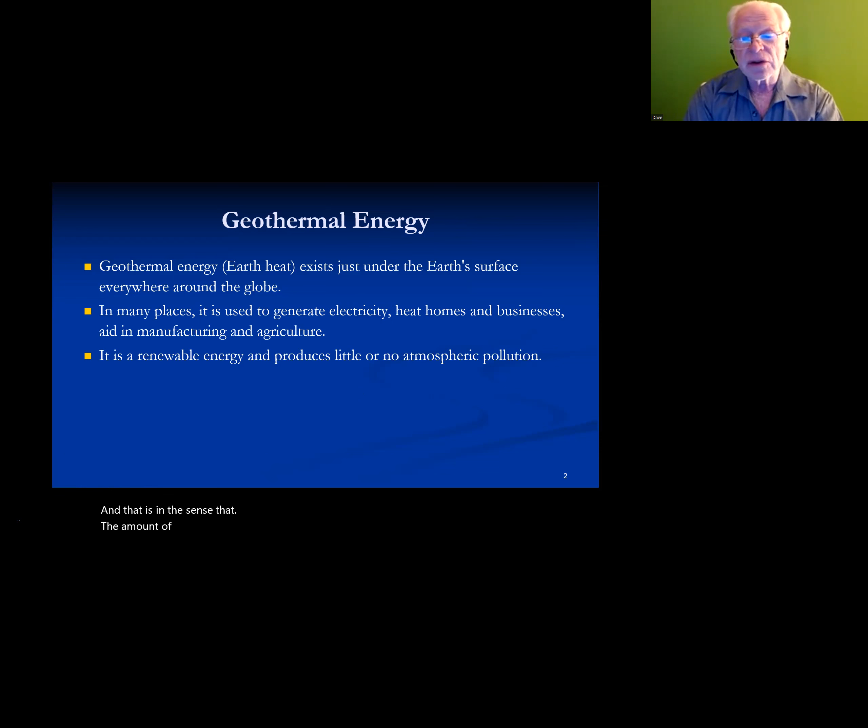And the energy exists under the earth's surface everywhere around the globe. In many places, it's already used to generate electricity, heat homes and businesses, and it's also used in certain types of manufacturing and agriculture. It is a renewable energy, in the sense that the amount of energy that's inside the earth is going to last for billions of years. Now, the sun is a renewable source, and the sun is going to last billions of years. So it's on the same order of magnitude as the sun.

But today, very little of our energy use comes from geothermal energy. A very small part of it. And that hopefully will be changing. So I'm going to discuss the different types of geothermal energy, the advantages and disadvantages and problems of using it, and what prospects there are for increased use in the future.

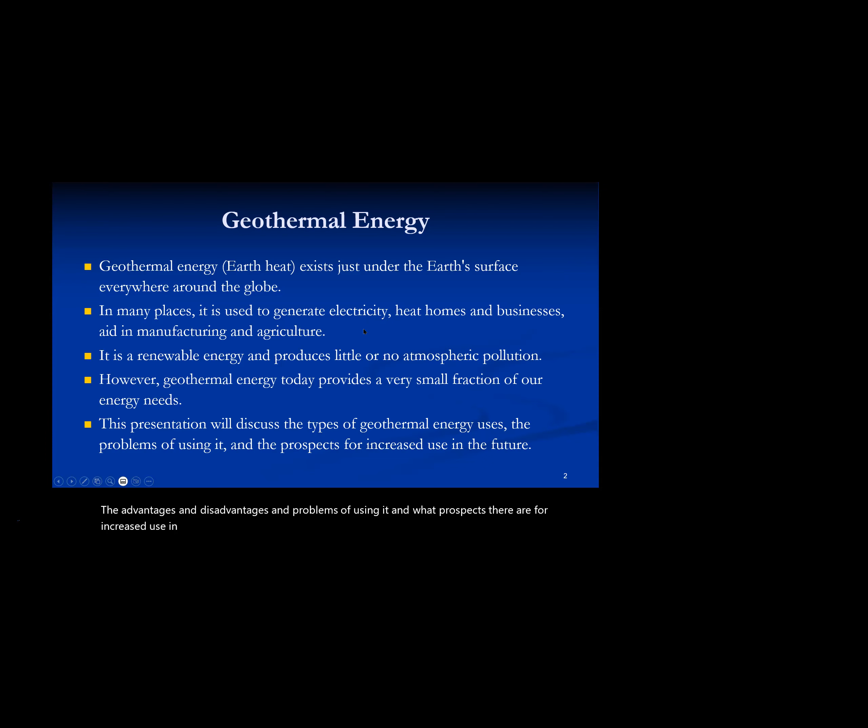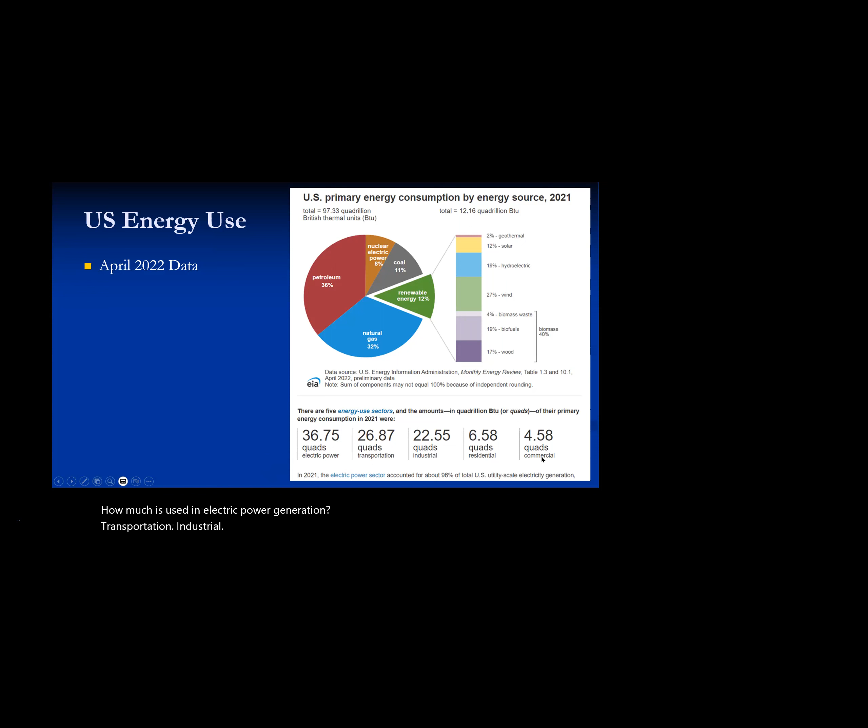Down here, and this is quadrillion BTUs. This is how much is used in electric power generation, transportation, industrial, residential, and commercial. So the main purpose of showing you this is just to put geothermal in the tiny fraction of energy use in this country that it has right now.

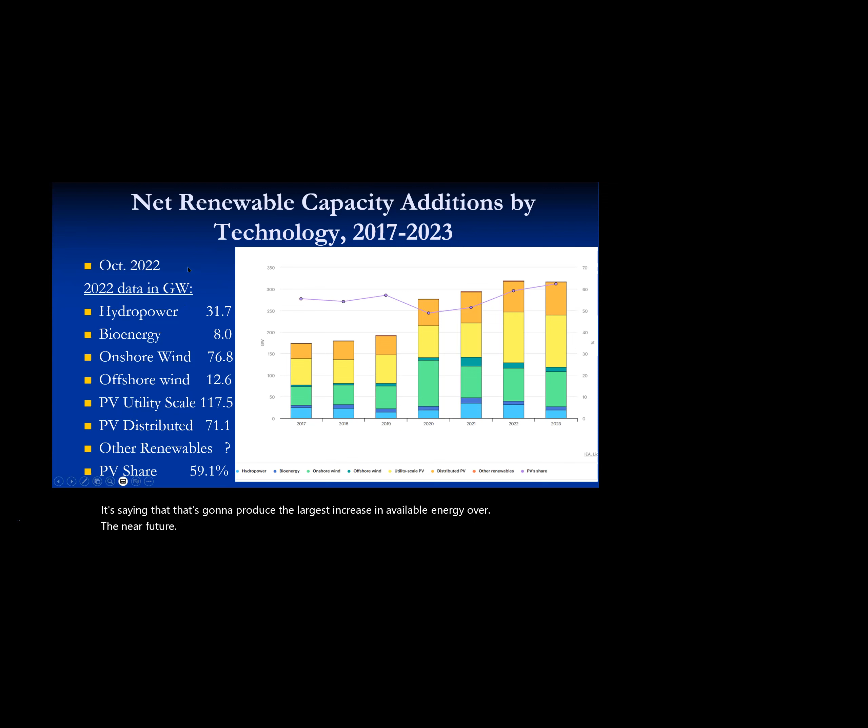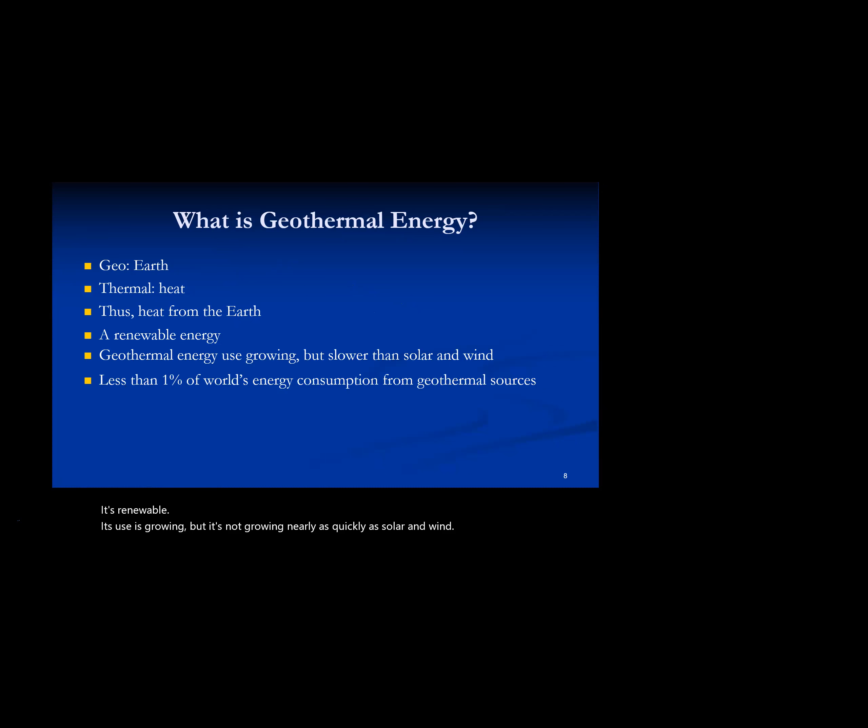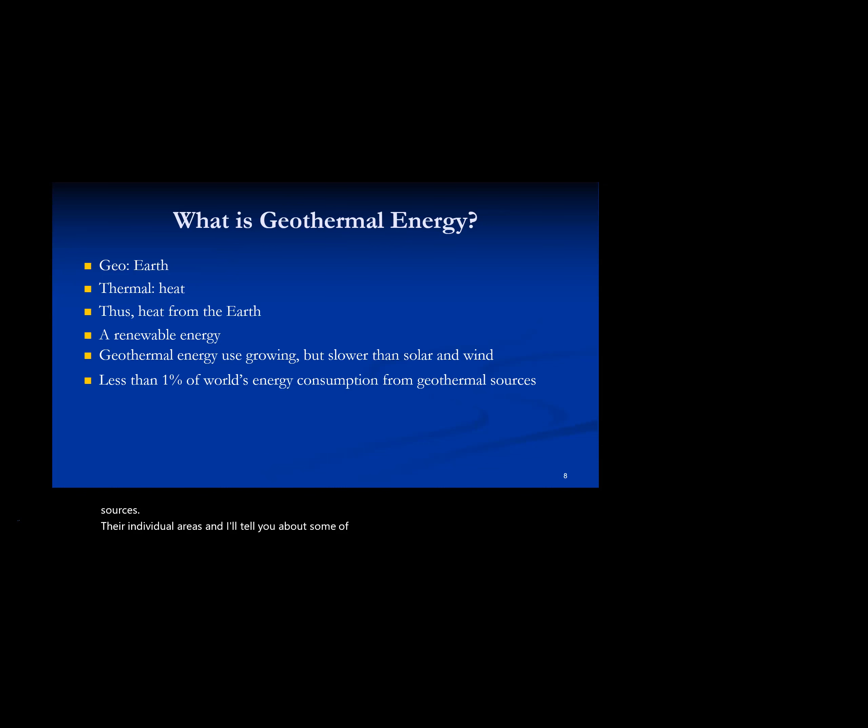So let's talk about what geothermal energy is. From the Greek, geothermal would mean earth heat. So heat from the earth is what we're talking about. It's renewable. Its use is growing, but it's not growing nearly as quickly as solar and wind. Today, less than 1% of the world's energy consumption comes from geothermal sources. There are individual areas, and I'll tell you about some of those, where the percentage is much, much higher. But those are just small areas.

We also, in places where it's not that easy to get, we drill wells. And so we encourage the energy to the surface. And you can find the energy in some places in hot water, in other places steam. Some places there is no water or steam, so it's just hot rocks, but we can still make use of those for energy use, and also in magma.

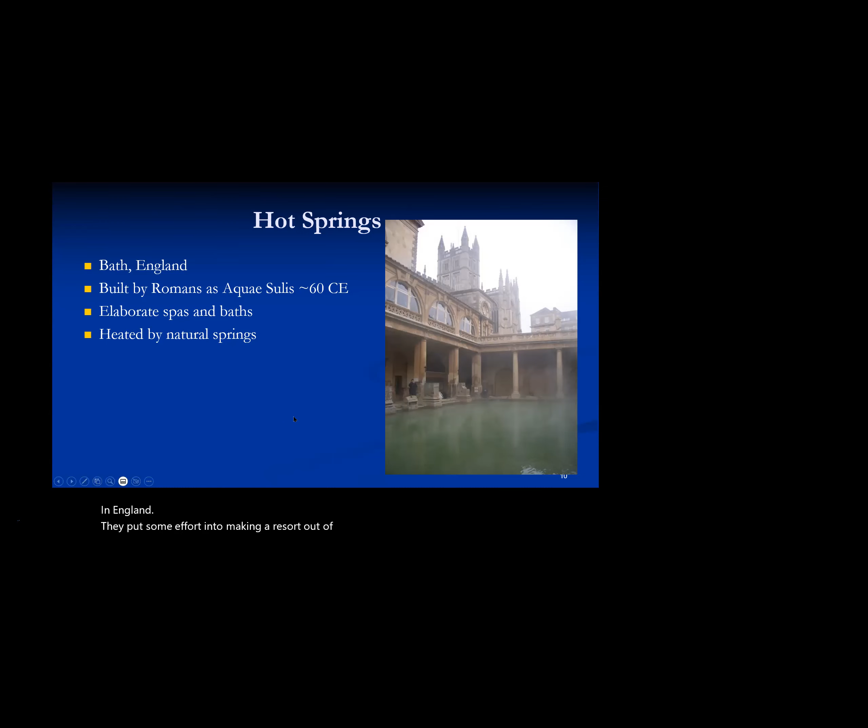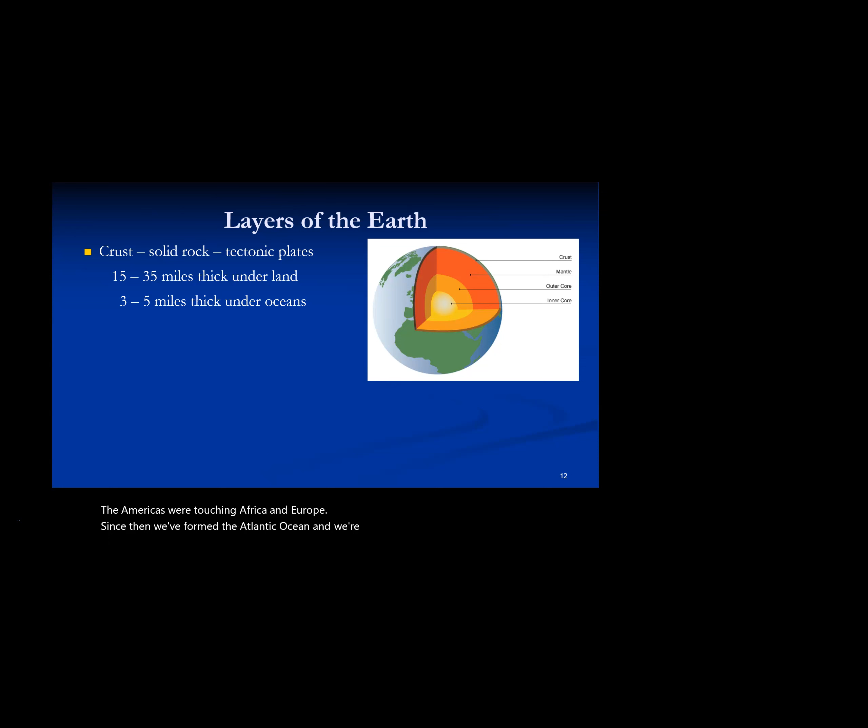All right. So let's take a look at the layers of the Earth. The top layer we call crust. It's solid rock, and the rock is in tectonic plates. The plates over millions of years have moved around. If you look at the pictures of a couple 100 million years ago when the Americas were touching Africa and Europe, since then we've formed the Atlantic Ocean and we're now separated, but those plates are still moving around. They are 15 to 35 miles thick where there's land, but only 3 to 5 miles thick under oceans.

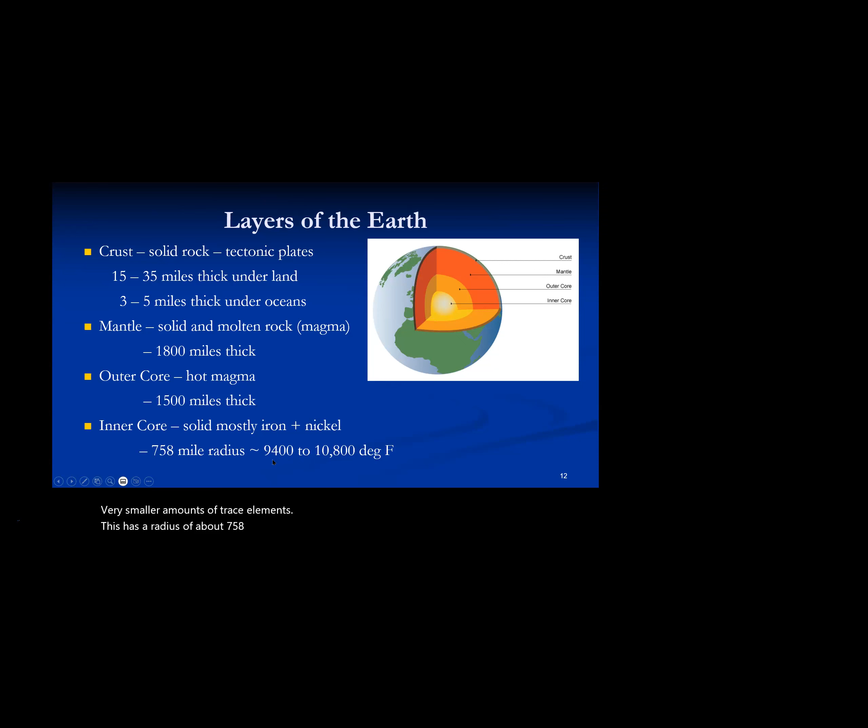Beneath the crust is the mantle, which is solid and magma. So it's solid rock and magma. That's 1,800 miles thick. And then beneath that's the outer core, which is hot magma. And that's 1,500 miles thick. And beneath that is the inner core, which is mostly solid iron and some nickel mixed in and some very small amounts of trace elements. This has a radius of about 758 miles. And depending on where you read, the temperature is either around 9,400 or 10,800 degrees Fahrenheit.

Now, recent stories have said that the rotation of the core may have paused. And apparently over history, it does that from time to time and reverses rotation direction. So I'm not going to go into that in any detail, but just wanted to make note of it.

And there's another paper that was just published that said they think maybe 100 miles down, there are streams of liquid magma moving around, and they may have something to do with the movement of the tectonic plates. I haven't read that whole thing, but that's something that just came out.

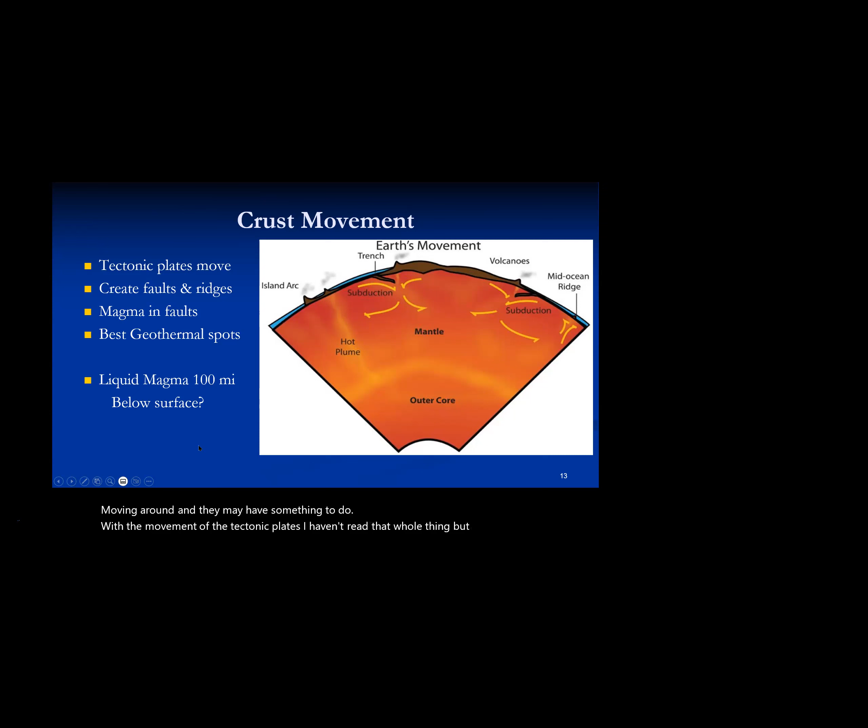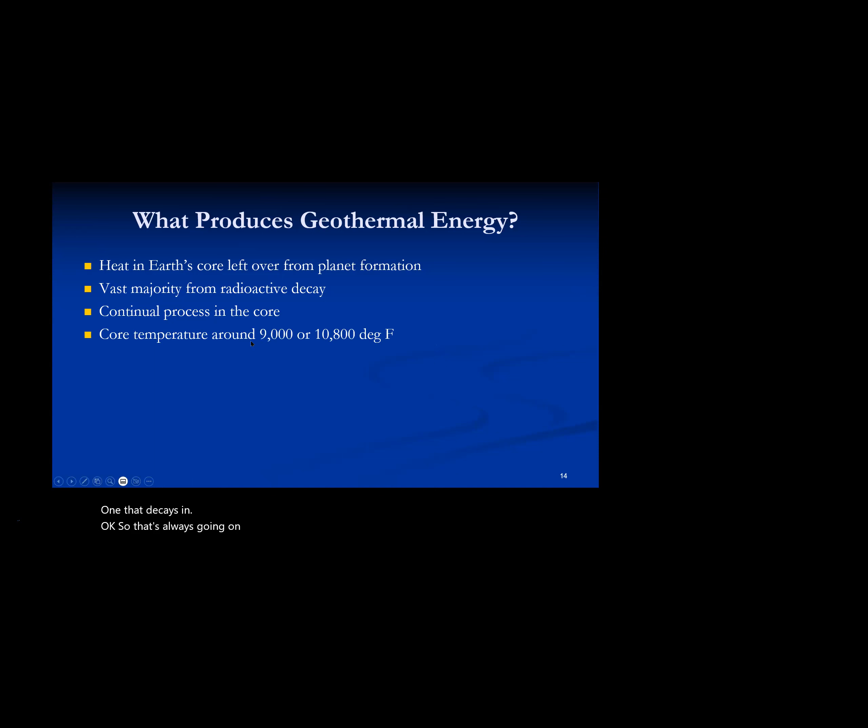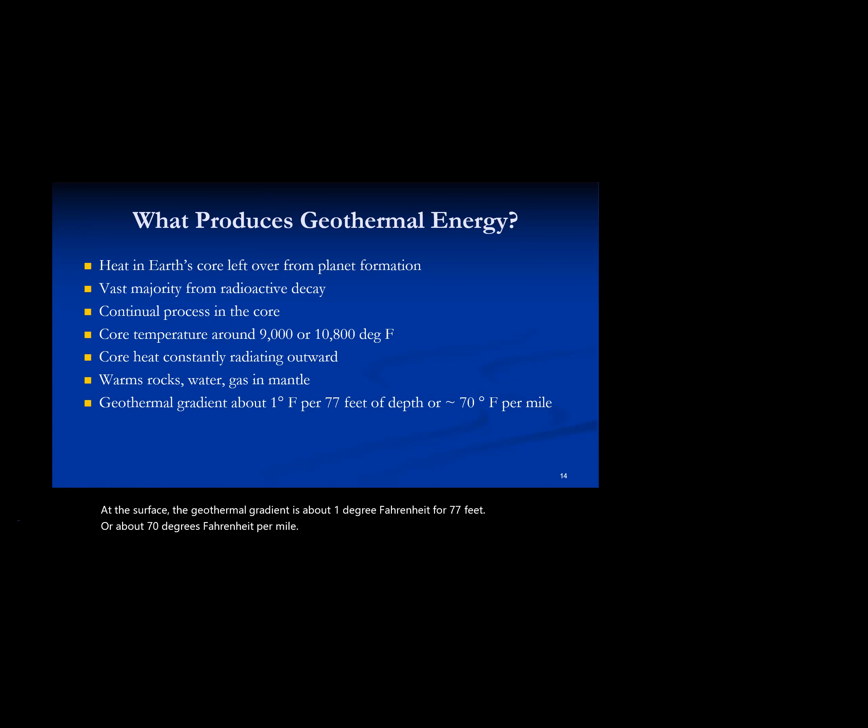At the surface, the geothermal gradient is about 1 degree Fahrenheit per 77 feet, or about 70 degrees Fahrenheit per mile. That's not constant as you go down. If it were, you'd get to much higher temperatures in the core. But anyway, near the surface, that's what the gradient is. However, it can be a lot higher if you're in a geothermal reservoir. So if you're in an area that's been heated up by the internal core, the gradient could be much higher.

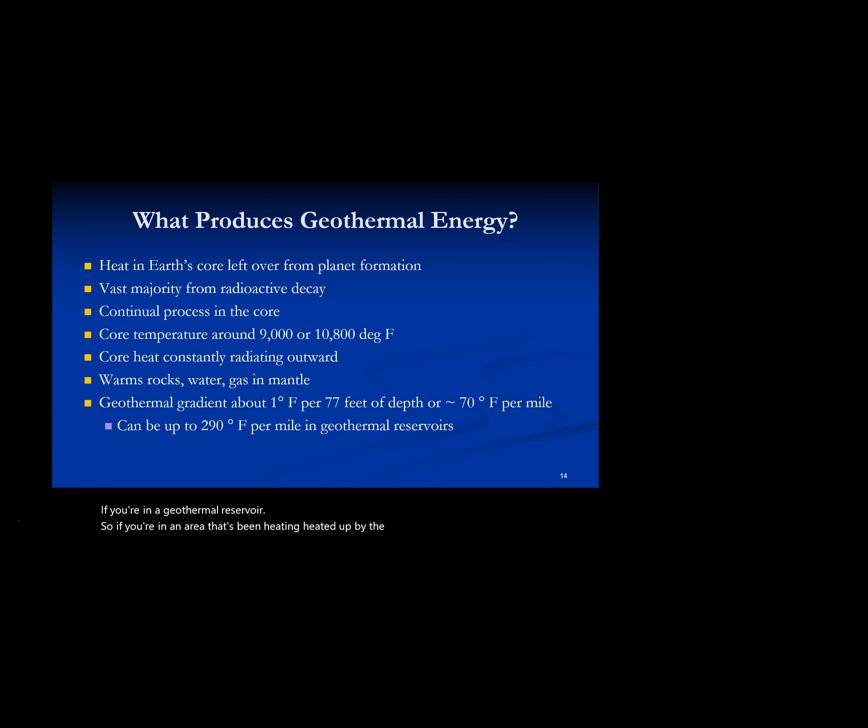So, advantages of geothermal energy. For one thing, it's renewable. So it's not going to run out, as our fossil fuels will. It's reliable. The heat source is constant. You go down a little bit into the earth, and the temperature's pretty constant year-round. It's always available. It's not like wind and solar that only provide energy for you some of the time. It's always there. Not subject to weather.

And it's spread out all over the world. There are sources pretty much everywhere. Some much easier to get at than others, but it's everywhere. And it produces either very little or no pollution at all, which is a huge advantage. When you build power plants to use geothermal energy, they can last for decades and centuries. Yeah.

The power plants, when built, are smaller than power plants using other forms of energy. And not only that, but they can be scaled up and down, and they can be made much smaller than fossil fuel power plants.

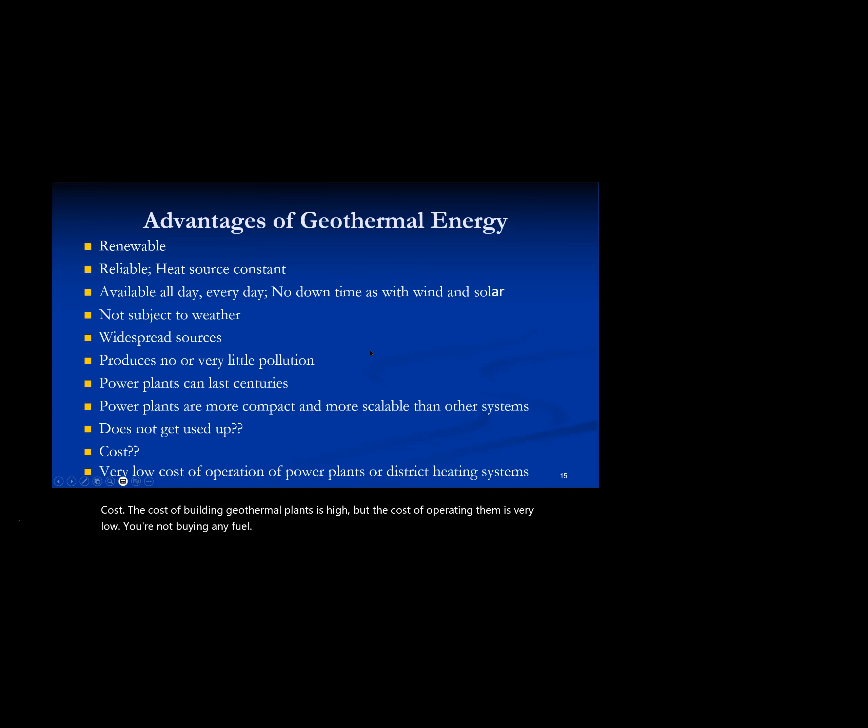The cost of building geothermal plants is high, but the cost of operating them is very low. You're not buying any fuel. Okay. So what are the disadvantages? Well, you can get small earthquakes.

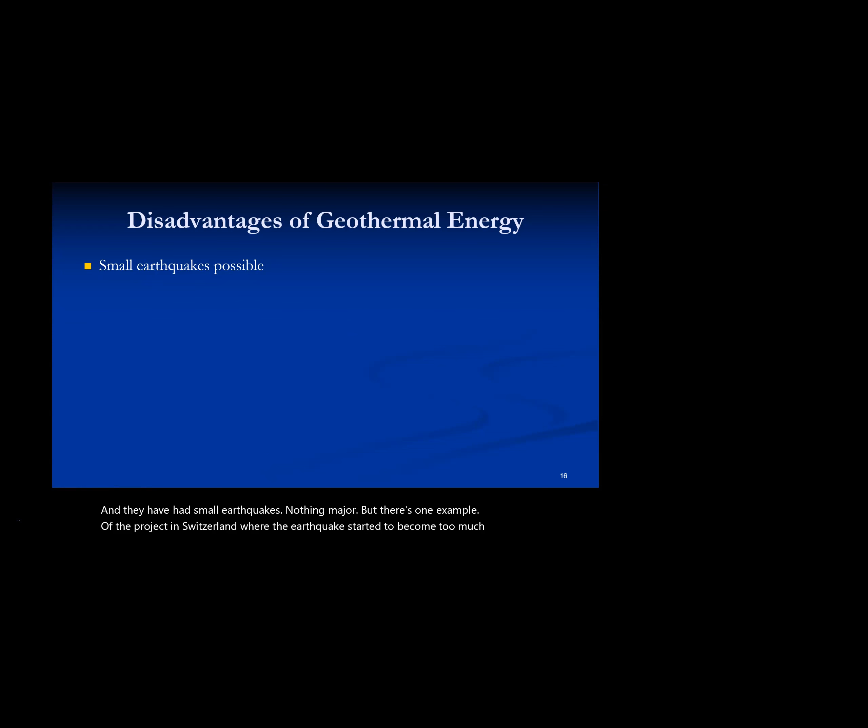When you build the power plants and you drill into the ground and you push cold water down through these wells, it can crack the rock. It can increase the size of cracks that are already there. And they have had small earthquakes, nothing major, but there's one example of a project in Switzerland where the earthquakes started to become too much of a problem and they closed it down. They closed down the geothermal power plant.

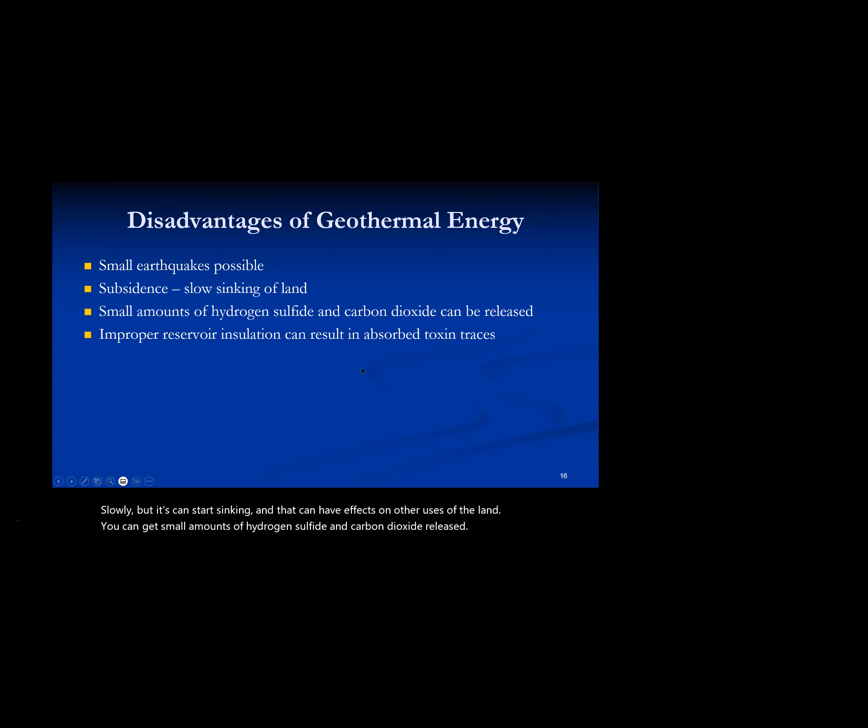Subsidence happens also. You're making all these changes to the crust, and sometimes the land can start sinking slowly, but it can start sinking, and that can have effects on other uses of the land. You can get small amounts of hydrogen sulfide and carbon dioxide released. If you don't properly insulate the reservoir, the water that's in it can go over and absorb toxins. And so they can come up to the surface and can be released. So that is one caution.

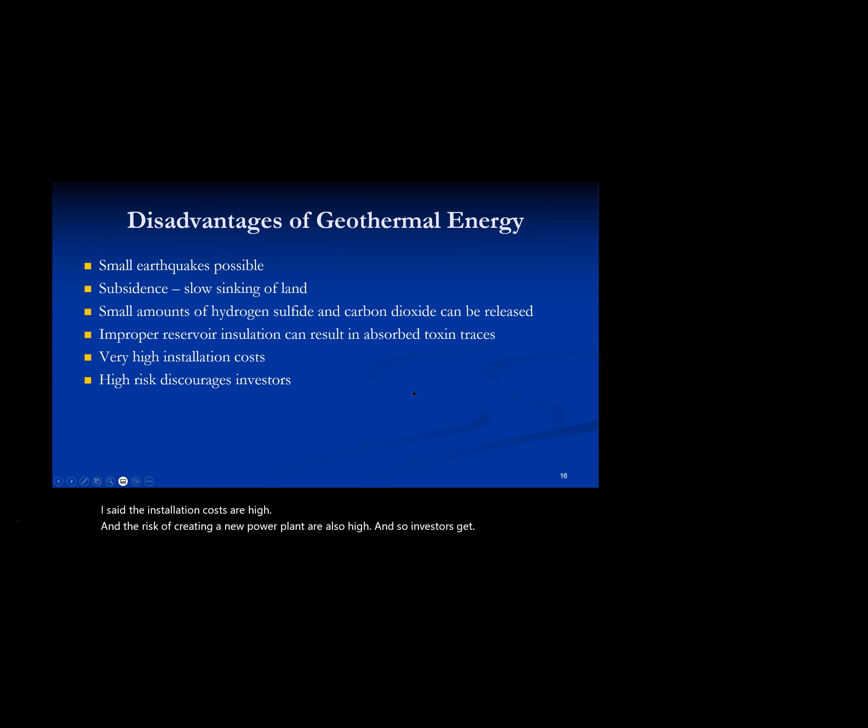I said the installation costs are high, and the risks of creating a new power plant are also high. And so investors get discouraged by that. So what are some of the problems? Well, to produce energy, you need the heat near the surface. And that's only true in maybe 10% of the surface. It's all over the place, but it's not every place. It's particularly available along fault lines.

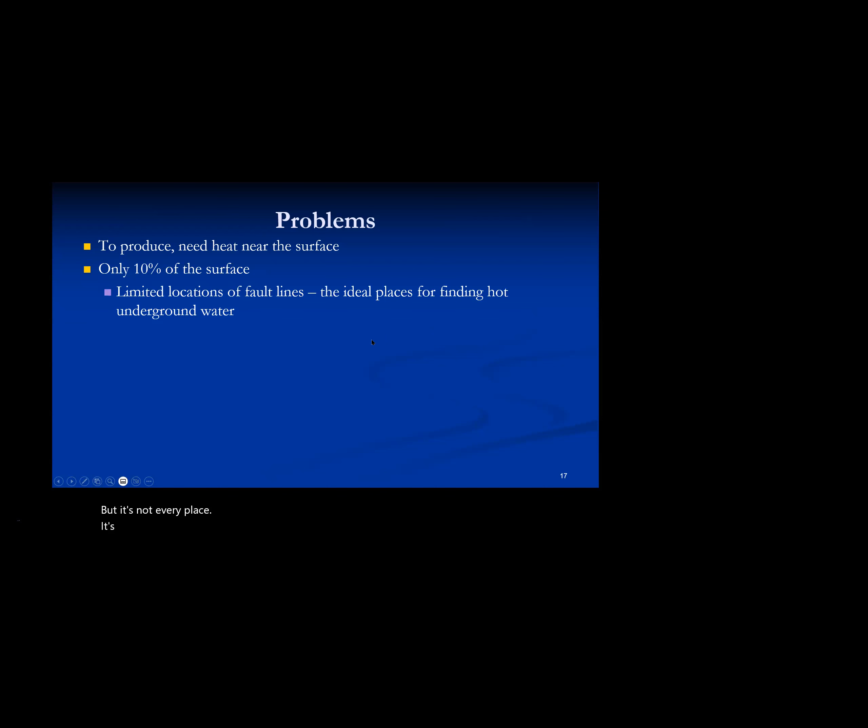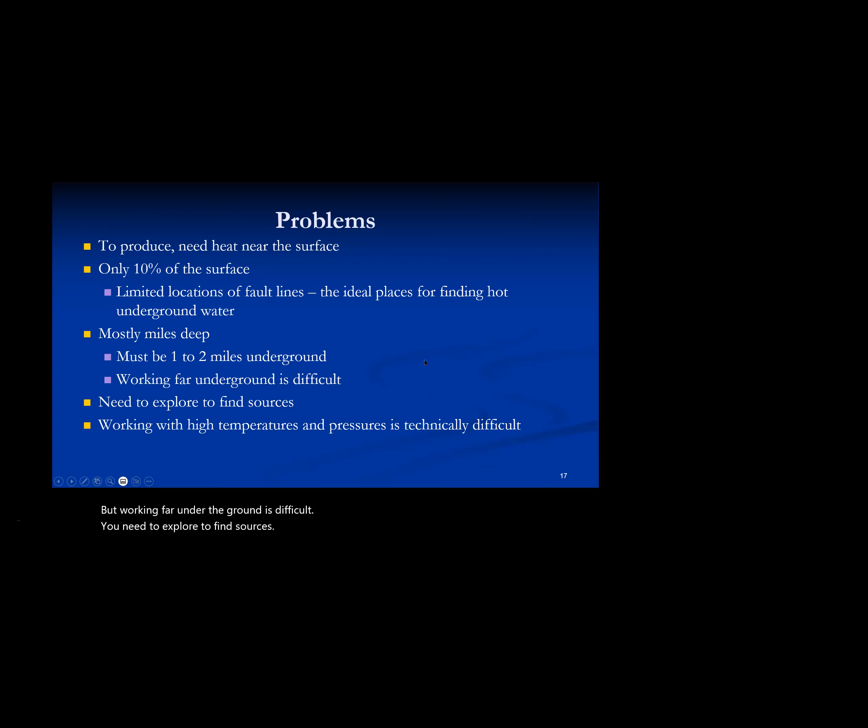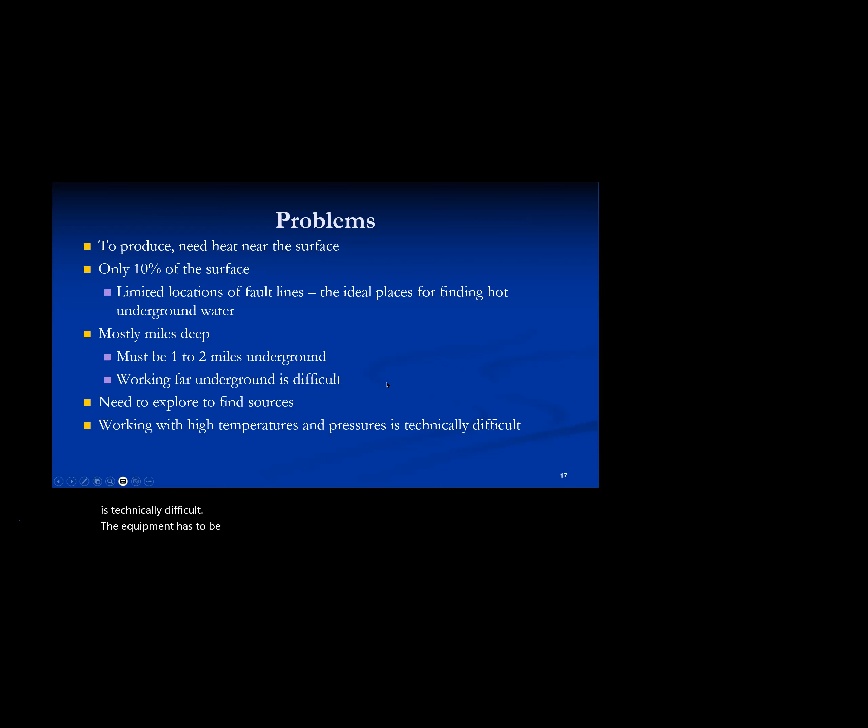So what are these risks? If you want to drill holes deep into the surface, going down miles, that gets expensive. You might find a place where you think you're going to find a suitable heat source, and maybe it doesn't turn out that way. When you find a source, it might run out. And that's especially when you try to extract more energy than the Earth is putting into that particular source. It's expensive to put the heat pump pipes into the ground. And I'll show you some more detail of that.

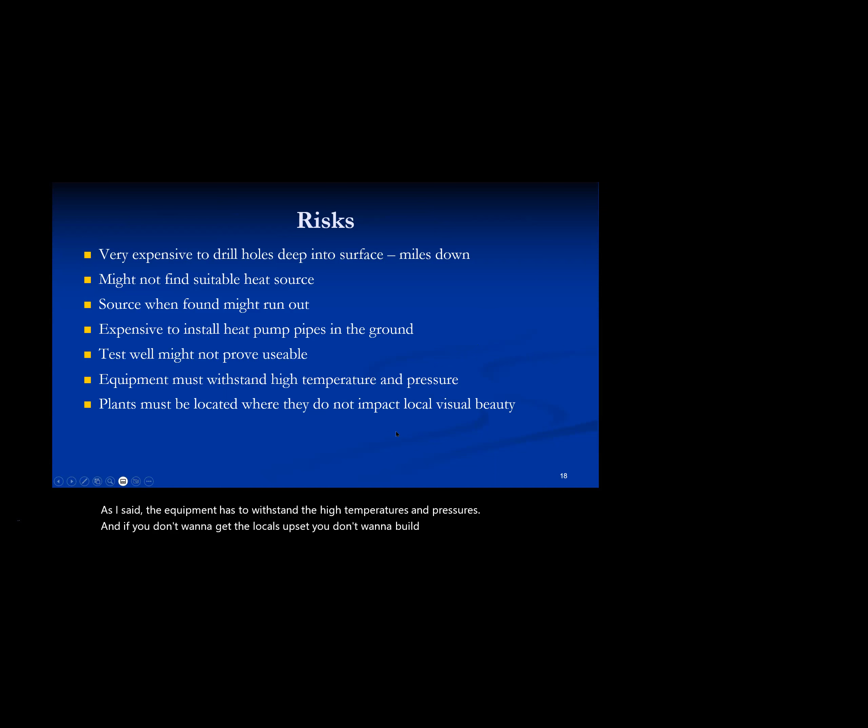If you have a test well, you may not be able to use it. As I said, the equipment has to withstand the high temperatures and pressures. And if you don't want to get the locals upset, you don't want to build it where they think there's a beautiful scene. So that's another constraint.

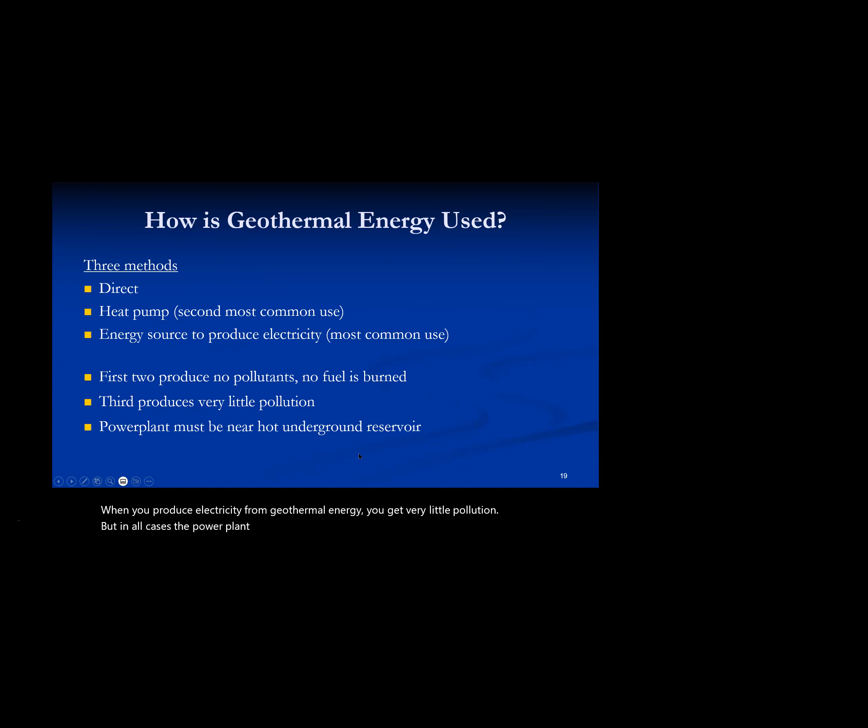So how is geothermal energy used? Well, there are 3 main methods. The direct, the heat pump method, which is the second most commonly used, and the energy source to produce electricity. And that is the most common use of geothermal energy. The big advantage of the first 2 of these, they produce no pollutants because there's no fuel burned. You do have to use some electricity to run things like pumps, but no fuel is being burned right there. When you produce electricity from geothermal energy, you get very little pollution. But in all cases, the power plant has to be built near some hot underground reservoir.

Okay. So, producing electricity, and this is the most common method. Currently, I think this was from last year, 26 countries are doing that. If you're going to produce electricity, that's good because the users don't have to be local. Around the world, something like 11 million homes are using geothermal energy for their electricity. That number might be higher because I didn't get this year's numbers for everything.

This uses water that's usually 300 to 700 degrees Fahrenheit. And you put your power plant near the heated water or steam that's underground. You drill the well or the wells into the reservoir 1 or 2 miles deep. Down there, the pressure is very, very high, and it keeps the water liquid. So you bring that up through your pipes, and the hot water or steam at the surface can be turned on turbine blades, which spins the turbine, and the turbine then spins a generator, which gives you the electricity.

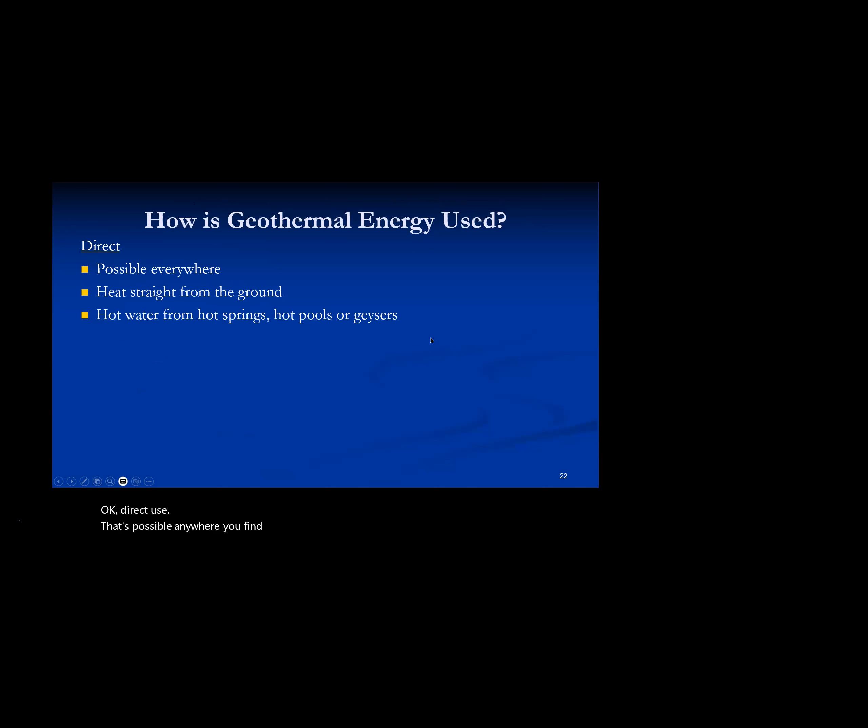Okay, direct use. That's possible anywhere you find an underground reservoir. You bring the heat up straight from the ground. It comes up in hot springs and pools or geysers. And people have been using that for bathing, for cooking, for heating their pools, their houses, and all these other things, including sidewalks and roads in the winter. It keeps greenhouses warm. They use it at fish farms, drying lumber, and processing fruits and vegetables. So it has a wide range of uses.

Or you can drill two deep wells. Now, with direct use, in general, you drill one well and you bring the steam or the hot water up and use it. But you can drill two deep wells, so you pump water into one. The water goes over hot rocks, gets heated up, and then you bring it up to the surface and you recycle it. And of course, there are also tourist attractions that use the direct geothermal heat.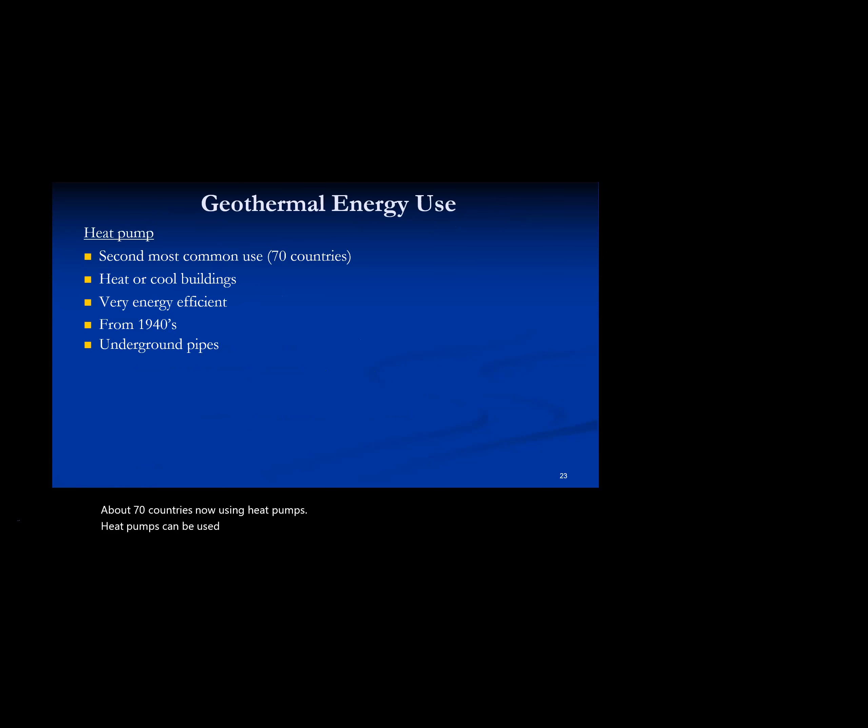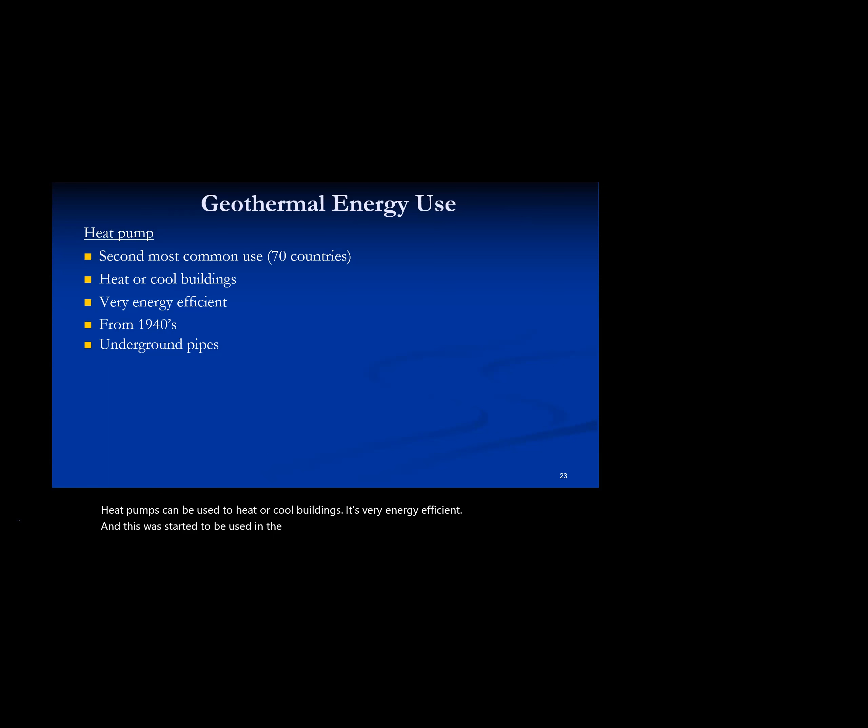The second use is heat pumps. About 70 countries are now using heat pumps. Heat pumps can be used to heat or cool buildings. It's very energy efficient. And this started to be used in the 1940s. So there are pipes under the ground, maybe 6 to 8 feet below the ground, and the temperature is pretty steady there, 55 to 60 degrees Fahrenheit, year round. When the surface freezes, that's just the first 2 or 3 feet, so it's above this. And a single system can be used to heat or cool houses.

When we're finished, I just found an hour ago some better pictures than the ones I have in here. If I have time at the end, I'll show them to you.

Now, the heat pumps can use either horizontal pipes in the ground, which only takes a couple of days to install, but requires a greater land area than when you put them in vertically. But that takes longer. You have to dig deeper. But it doesn't require as big a heat reservoir underground.

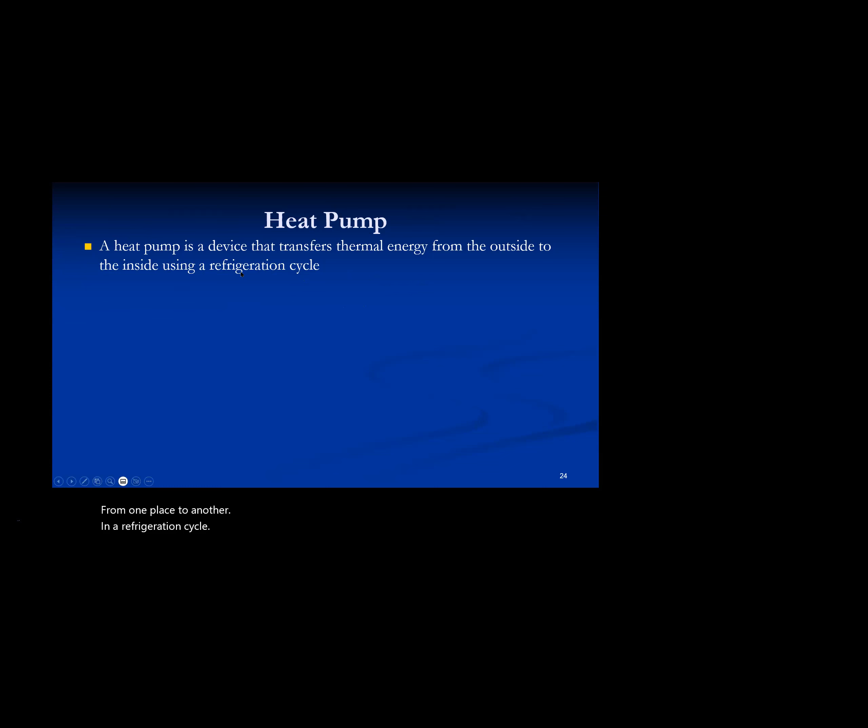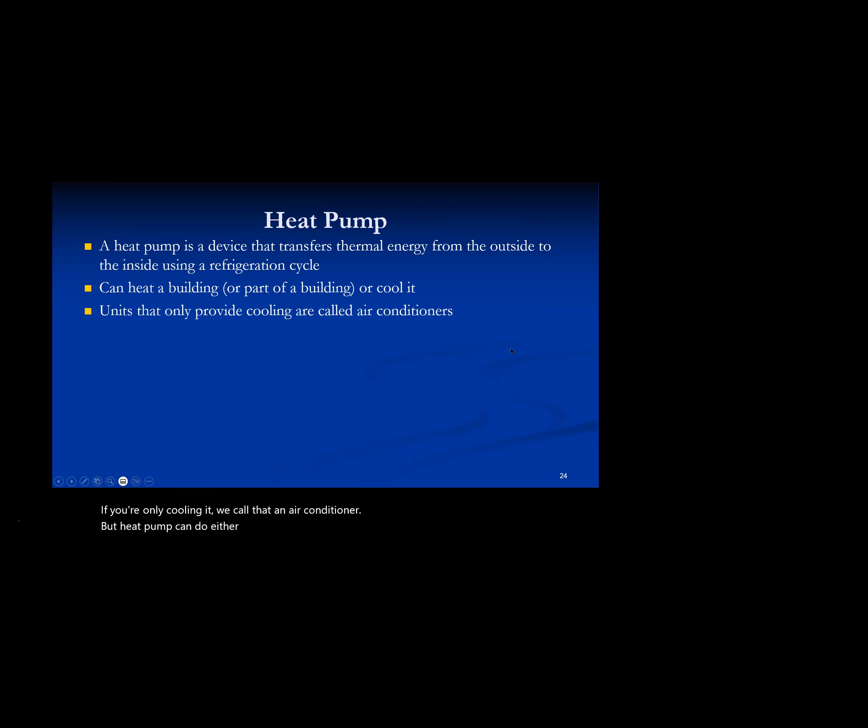So a heat pump is a device that takes thermal energy from one place to another. The refrigeration cycle is the cycle that the heat pump uses, and that can run either forward or backward. So you can heat a building or you can cool it. If you're only cooling it, we call that an air conditioner. But a heat pump can do either, and all you have to do is reverse a valve.

So it has a closed loop. Most of them have closed loops with one end inside and the other end outside the building. You circulate a fluid through that loop. You cool that liquid in one place and release the heat in another. I said that backwards. I'll show you the picture. It's clearer with the picture.

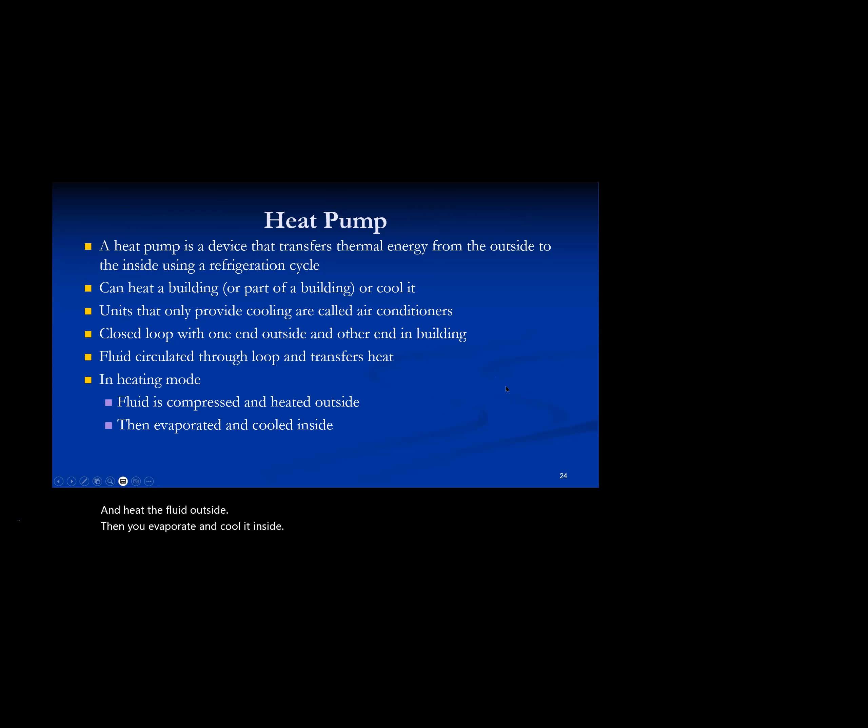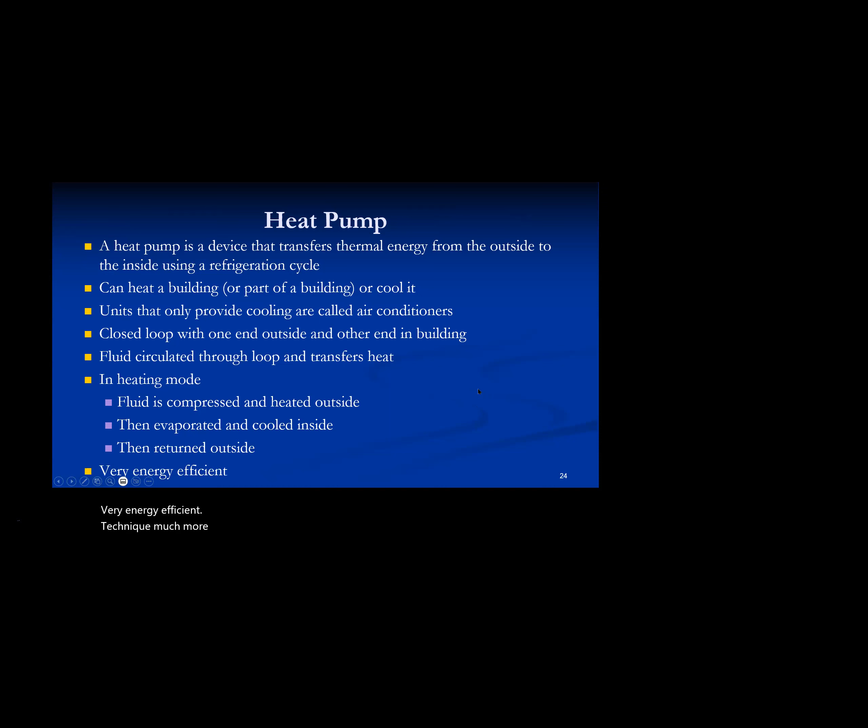In the heating mode, you compress and heat the fluid outside. Then you evaporate and cool it inside. So you're transferring the heat from outside to inside, even though if you're doing it with an air heat pump, you're taking heat from air outside that you may not think is hot. But by using this fluid, you're able to do that. And then you complete the cycle. Very energy efficient technique, much more efficient than using fossil fuels, because you're not burning anything.

And it's interesting because engineers and physicists like to use this type of a diagram to describe the process. But one of the problems with this is, and I guess it's von Neumann who said, nobody really understands entropy.

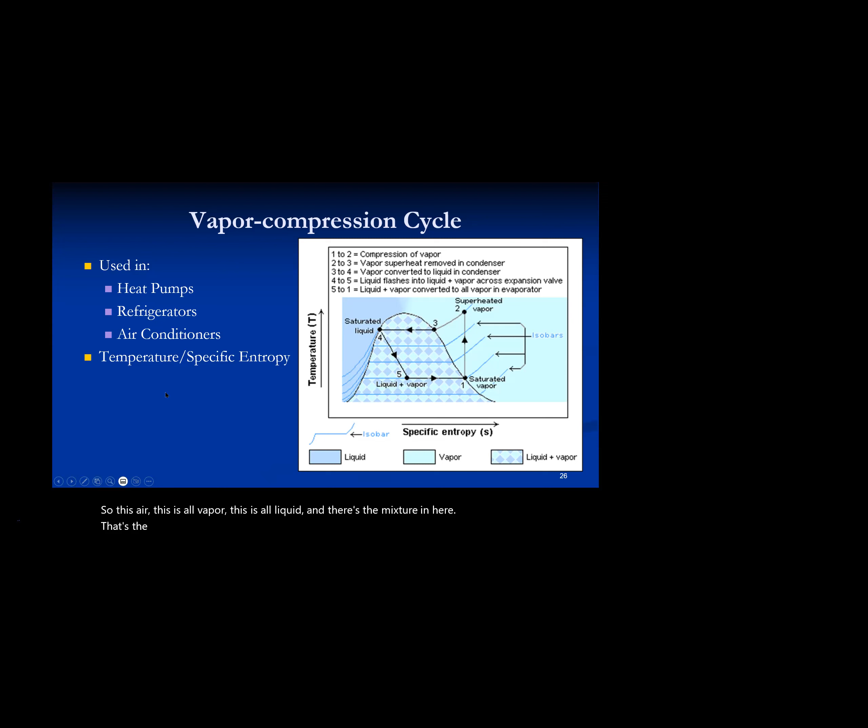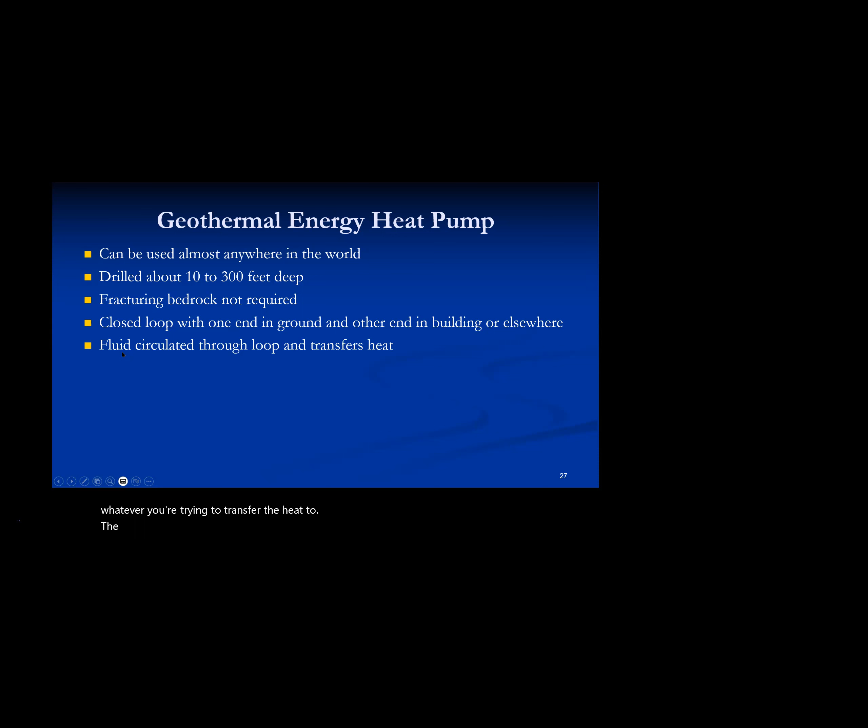So let's talk about the geothermal heat pump. This can be used just about anywhere in the world. You drill 10 to 300 feet into the ground. You don't have to fracture bedrock for this system. In general, there's a closed loop, one end in the ground, the other end in the building, or whatever you're trying to transfer the heat to. The fluid is circulated through the loop, transfers the heat, very energy efficient.

And this is possible because the ground temperature is about 50 to 60 degrees, which is warmer than the air in the winter and colder than the air in the summer. And that's just what you want to operate your heat pump. The Environmental Protection Agency called geothermal heating the most energy efficient and environmentally safe heating and cooling system that we have available.

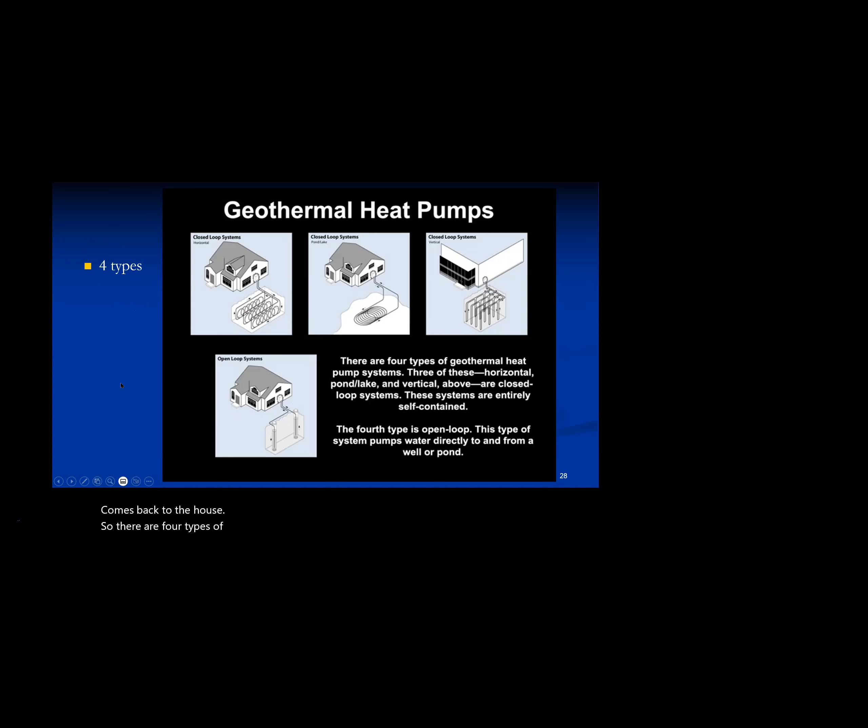Just want to briefly mention, low temperature geothermal energy comes from heat below 300 degrees Fahrenheit. It's available in lots of places a few feet below the ground, and it's used for heating greenhouses, homes, fisheries, and industrial processes.

Okay, so let's talk about the different types of steam plants. In the flash steam plant, high pressure hot water is pumped to the surface and flashed into steam to run the turbines. The cooled water is then returned into the ground, and most geothermal power plants today are of this type.

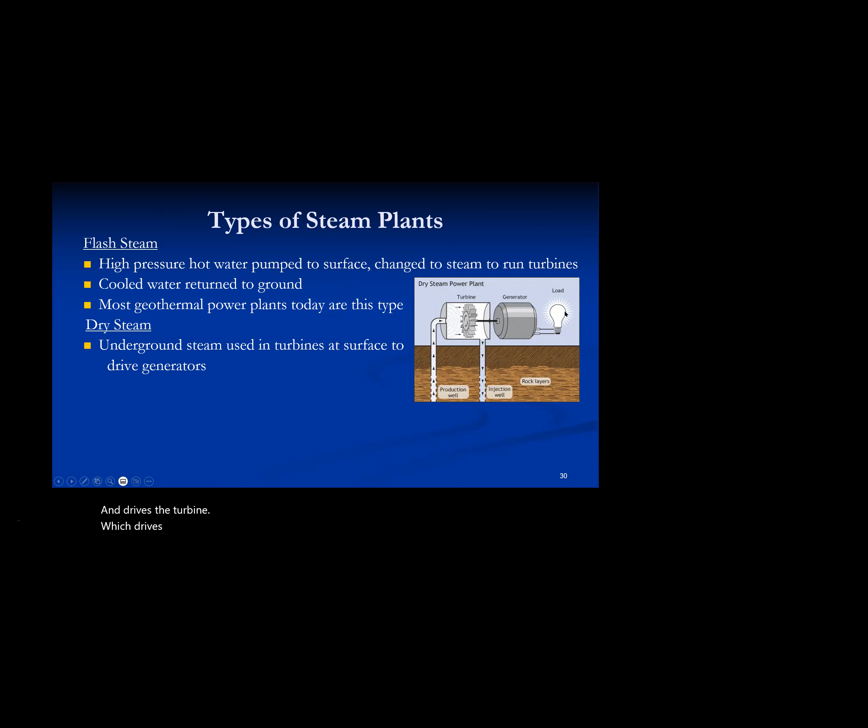Then there's the dry steam plant, and that's a very simplified picture of it. The underground steam comes to the surface and drives the turbine, which drives the generator, which produces the electricity. And that's the first plant in Italy over 100 years ago.

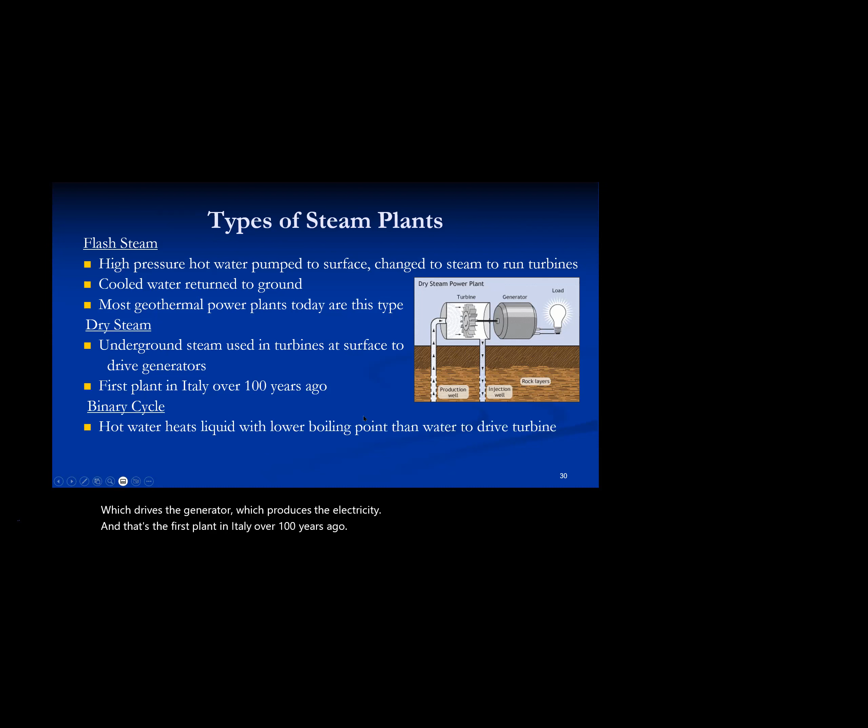Then there's the binary cycle. Hot water is brought up and transfers heat from one coil to another to a fluid with a lower boiling point than water. And that's what is used to drive the turbine. And this can use water between 225 and 360 degrees, which is cooler than the water that's used in the flash steam or dry steam plants. And these reservoirs are more common than the 600 to 700 degree reservoirs. So it can be used in more places.

Then I found this diagram. This is for a dry steam, and the reason I like this is it includes the mention of pumps and the cooling tower and the fan. So the pumps and the fan all require energy to run, but much less than the amount of energy that comes out of the system.

So from the well, you bring the hot water up, you get any sand out of it, you get the water drops out of it, you send it to the turbine, then you condense it, and you send it around again, back through the well that takes the water down into the ground.

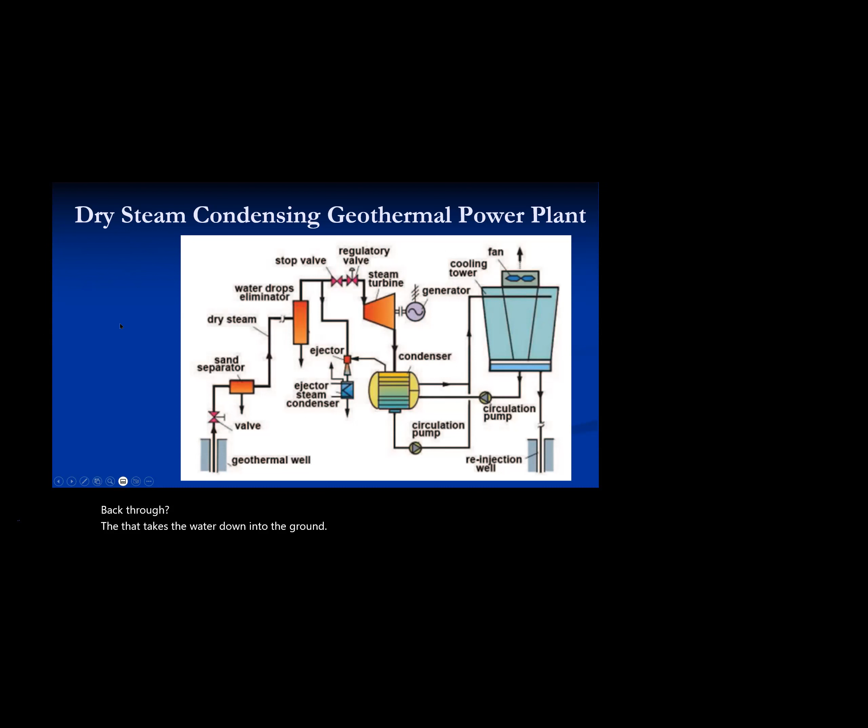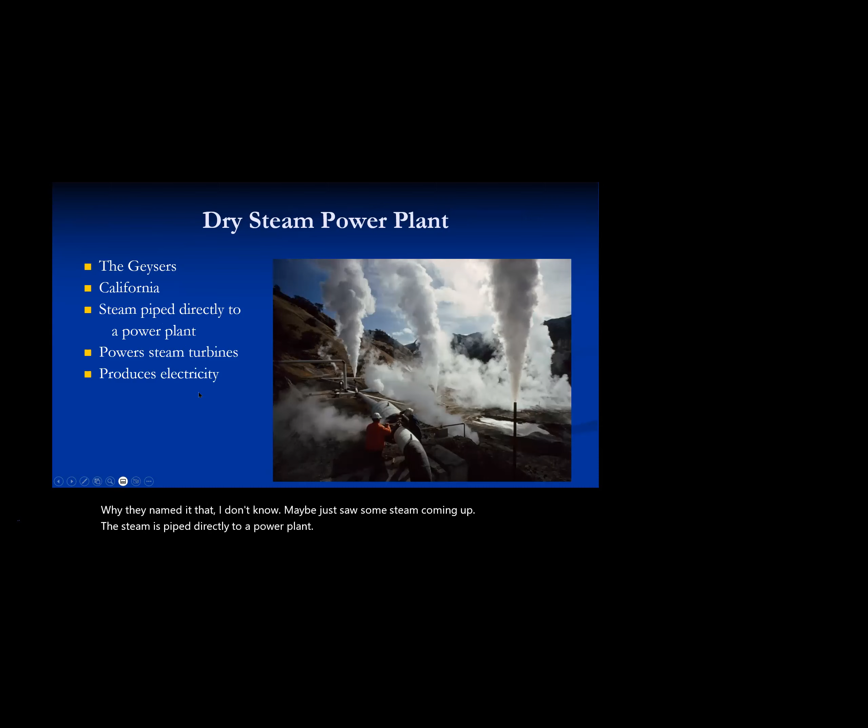Okay. One example of a dry steam power plant is the Geysers in California. Now, there are no geysers at the Geysers. Why they named it that, I don't know. Maybe they just saw some steam coming up. The steam is piped directly to a power plant and runs the steam turbines to produce the electricity. Okay. And that's the dry steam.

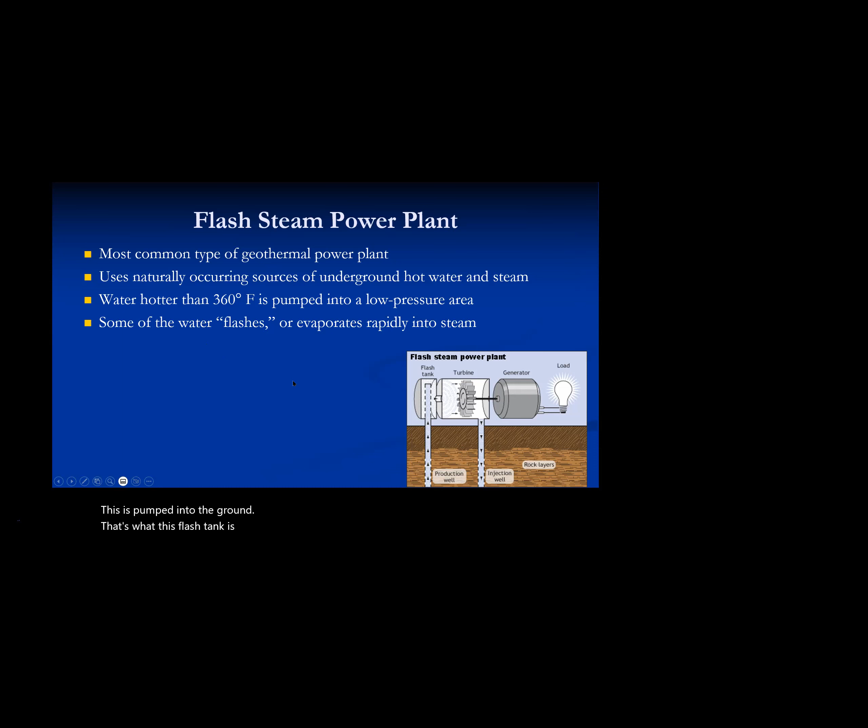But the most common type of geothermal power plant is the flash steam plant. So here you bring the hot water and steam up, you flash it, so you get all steam, that runs the turbine, the generator, and produces the electricity. Water is pumped into the ground. All right. That's what this flash tank is for. It evaporates the water into steam and runs the turbine. Okay. And there are plants like this in Iceland, the Philippines, and other places.

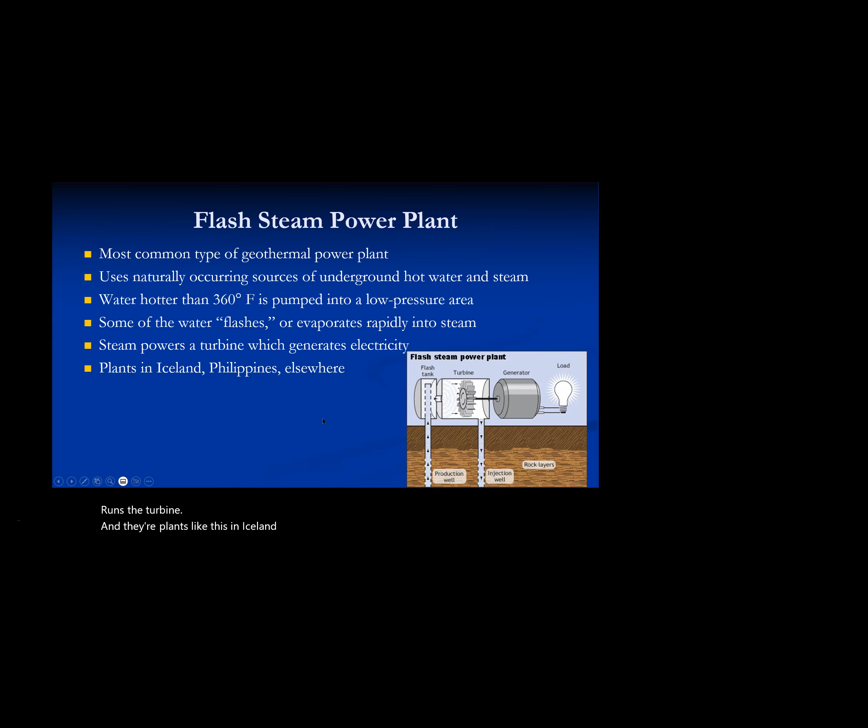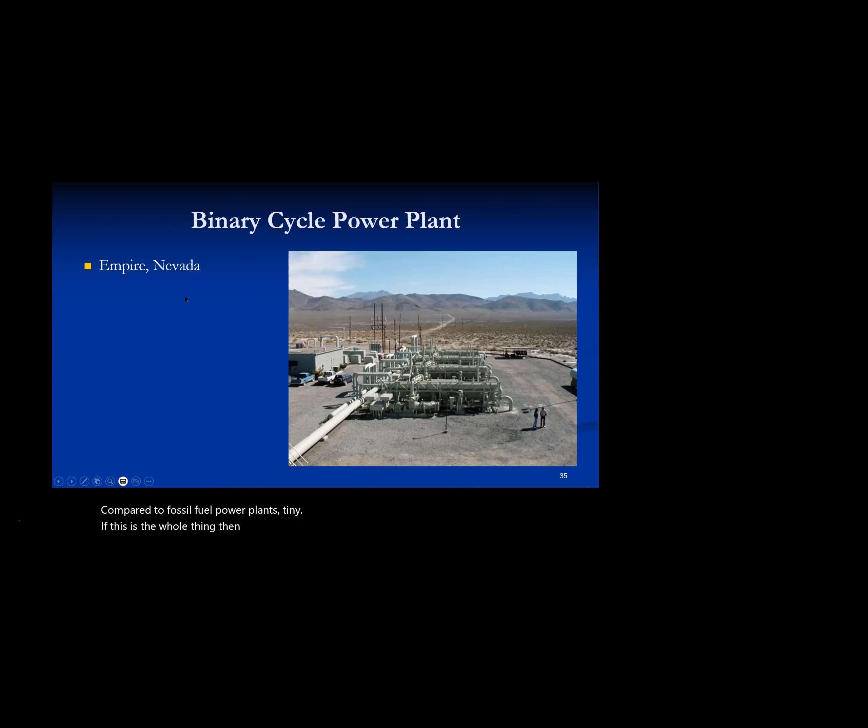Co-produced geothermal energy. This is where you have other energy sources. So if you have an oil or gas well that uses water, the water is heated, and in the past it was pretty much thrown out. No use was made of it. But in the US, we get about 25 billion barrels of hot water every year as a byproduct of these oil and gas wells. The steam from that can be used to generate electricity, and they're currently working on systems to make this portable. As a portable unit, it would have tremendous potential in poor and isolated communities.

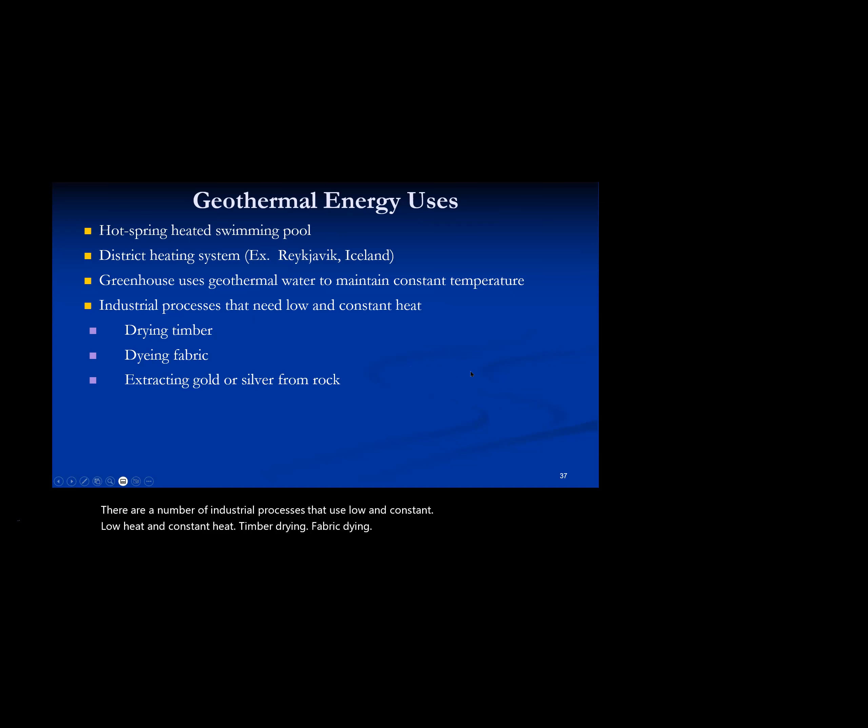So here's a list of uses for geothermal energy. In Costa Rica, I swam in a swimming pool that was heated by hot springs. District heating systems: this is where you bring the hot water up and distribute it to a community, and that's what they use in Reykjavik, Iceland. Greenhouses can use geothermal water to maintain a constant temperature. There are a number of industrial processes that use low, constant heat. Timber drying, fabric dyeing, and taking gold and silver out of rock all use low heat processes. Also drying fruits and vegetables.

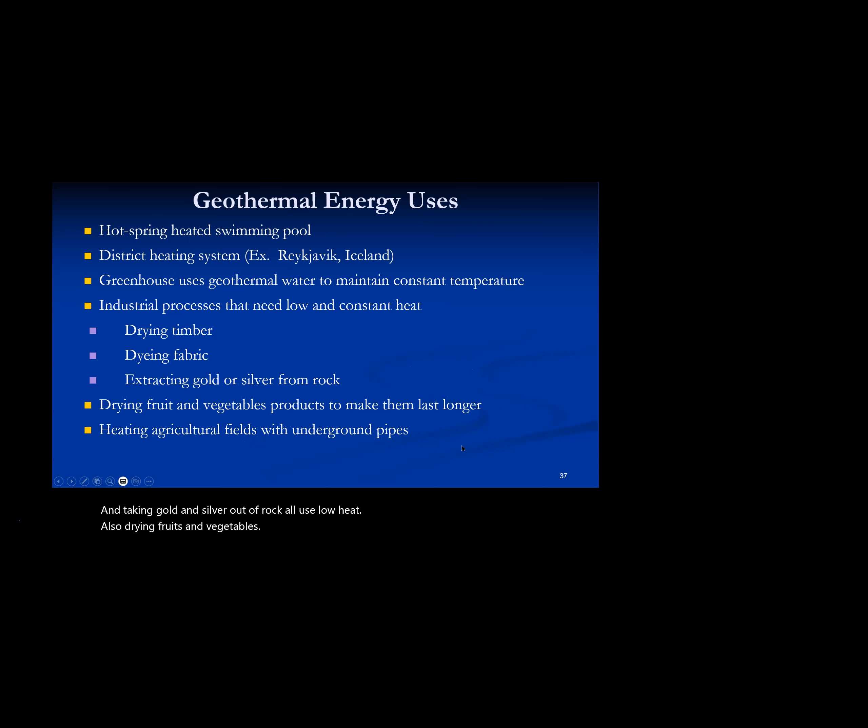Heating agricultural fields with underground pipes. So you don't have to send the pipes into a house. You can do that. And fish farms. So you can heat the water in the fish farms. And I assume tropical fish really like that.

In the USA, we are the world's leader in electricity production from geothermal energy. It replaces about 25 million barrels of oil annually. The government has made it a priority. It's available, however, mostly in the western states. These are the 7 states that currently have geothermal power plants: California, Nevada, Hawaii, Utah, Oregon, Idaho, and New Mexico. Perhaps in the future, there'll be more. California is the biggest user, Nevada is second. And in the US, it produces enough energy for about 3.5 million homes.

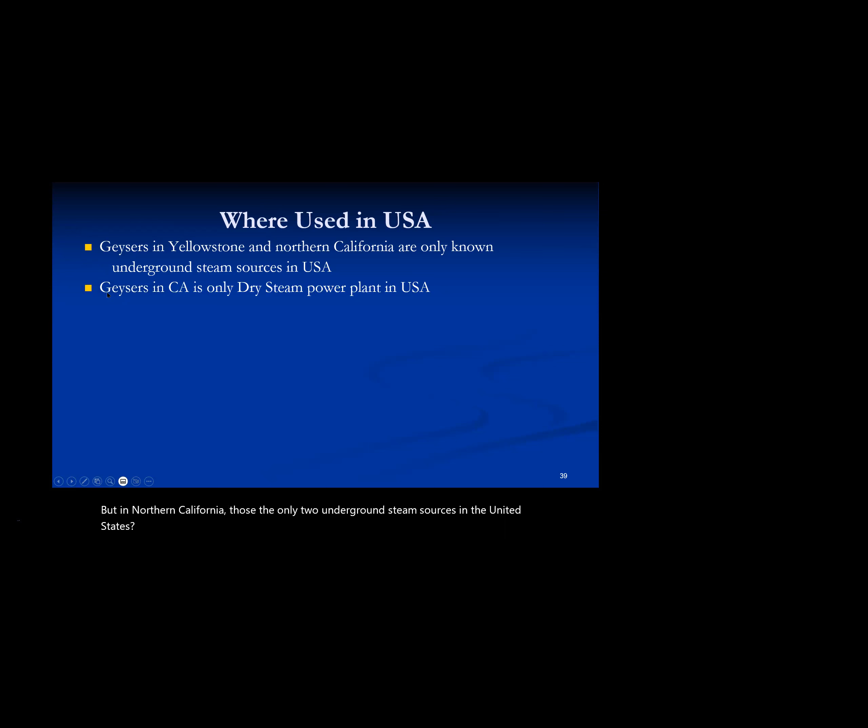In Yellowstone, there are geysers, but Yellowstone's a national park, so we can't build a power plant there. Or at least so far we can't. But in Northern California, those are the only 2 underground steam sources in the United States. It's called the Geysers in California, but there are no geysers there. It's a dry steam power plant, and at one point it was the largest geothermal power plant in the world. I'm not sure if that's still true. They have 350 wells and 22 power plants, and that's why it produces so much energy.

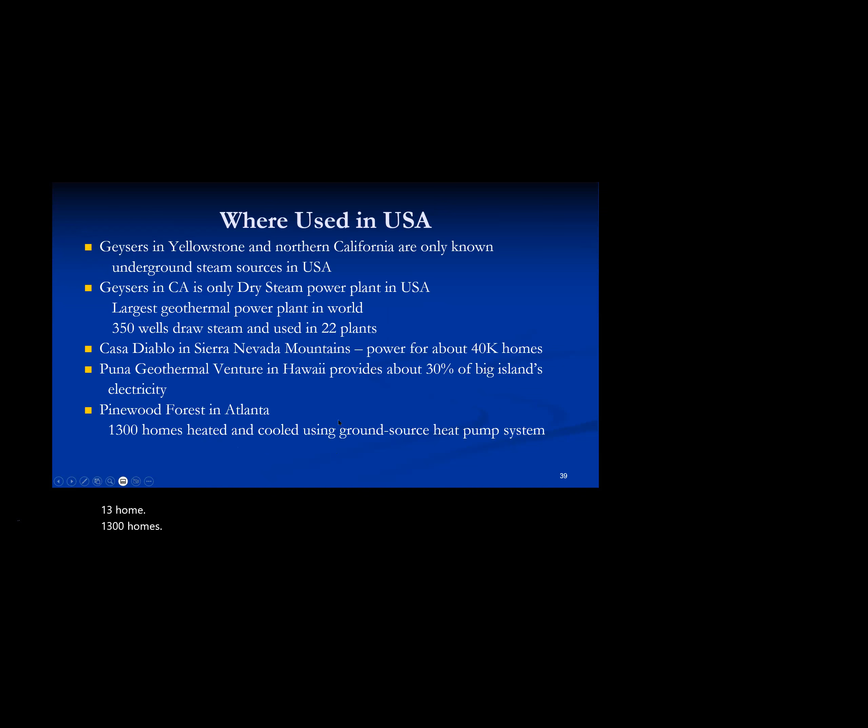Then in the Sierra Nevada mountains, they produce power for about 40,000 homes. In Hawaii, about 30% of the Big Island's energy is produced from geothermal. Pinewood Forest in Atlanta has 1,300 homes using a ground source heat pump system, and that's the first large-scale community in the United States. Up to 10% of our energy needs could come from geothermal sources in the future.

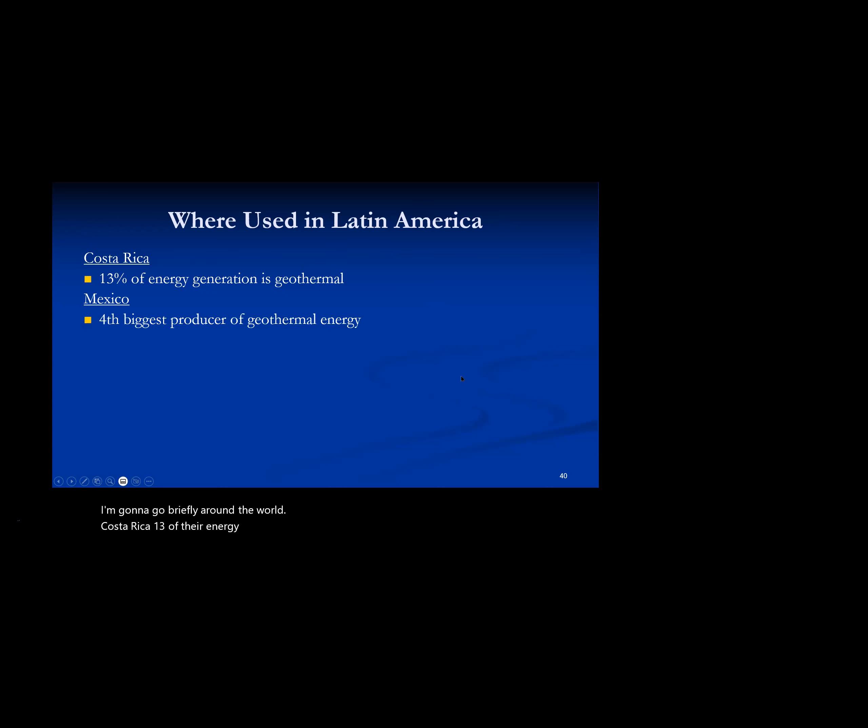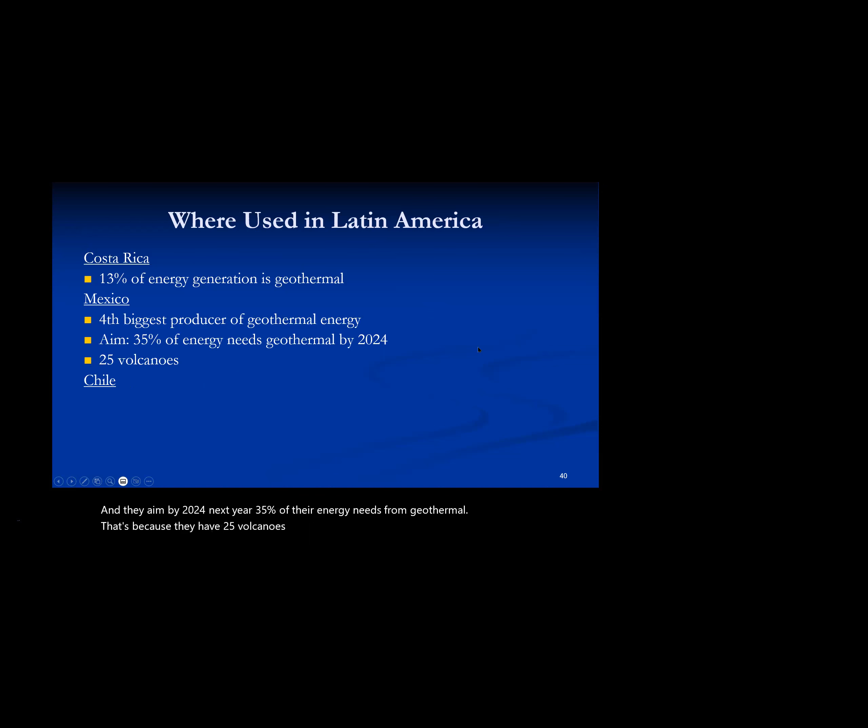I'm going to go briefly around the world. Costa Rica: 13% of their energy is geothermal. Mexico is the fourth biggest producer in the world, and they aim by 2024, next year, to get 35% of their energy needs from geothermal. That's because they have 25 volcanoes, so there's a lot of hot magma there. Chile is the largest undeveloped area in the world, in the mountains, and they opened their first geothermal plant. Argentina uses it for greenhouse heating.

In Europe, it's very patchy. There are not many good areas, but there are already, as of 4 years ago, 130 geothermal power plants. There were 6 innovative projects last year. In general, they use it for greenhouses and fish farms, and there is a European Geothermal Energy Council that's looking at future uses.

Iceland is the most outstanding country to use geothermal energy. The volcanic activity there produces all this molten rock and magma. In a small area, they have 6 flash steam power plants that provide over 90% of the heating and electrical needs for the whole country. Of course, there are only like 335,000 people in Iceland, so it's not a major thing in those terms, but they are sharing what they've learned with the rest of the world, so that's a good thing.

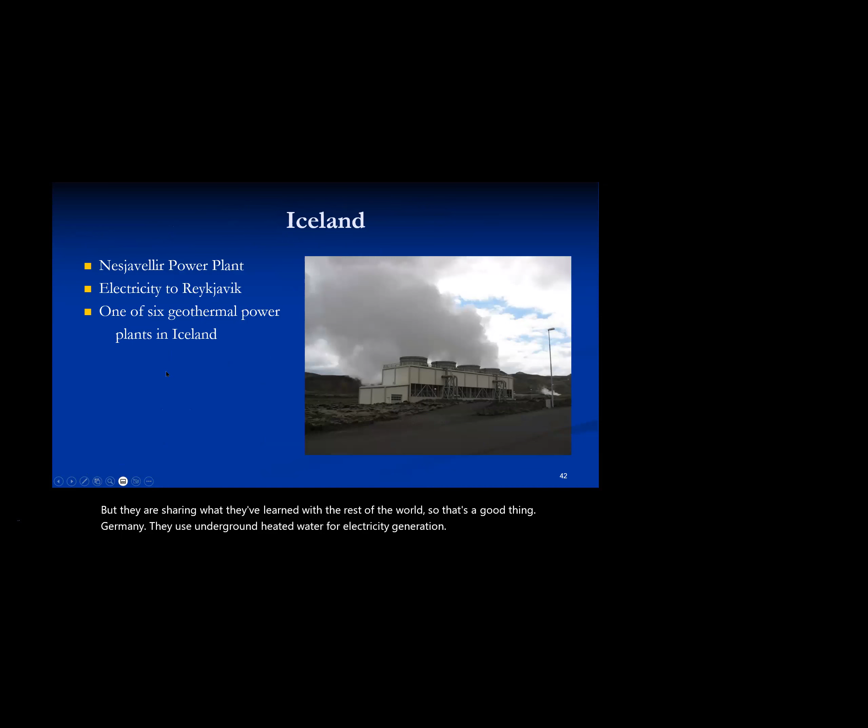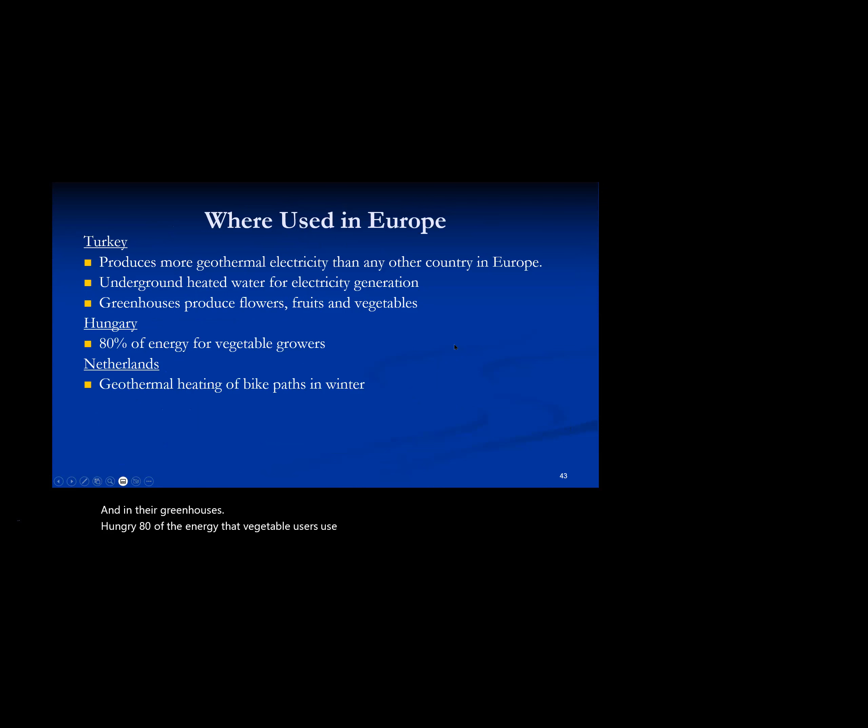Turkey uses underground heated water for electricity generation. And here's a picture of one of those plants in Iceland. Turkey is the biggest producer of geothermal electricity in Europe. They use it for electricity generation and in their greenhouses. In Hungary, 80% of the energy that vegetable growers use comes from geothermal. In the Netherlands, they're heating bike paths in the winter.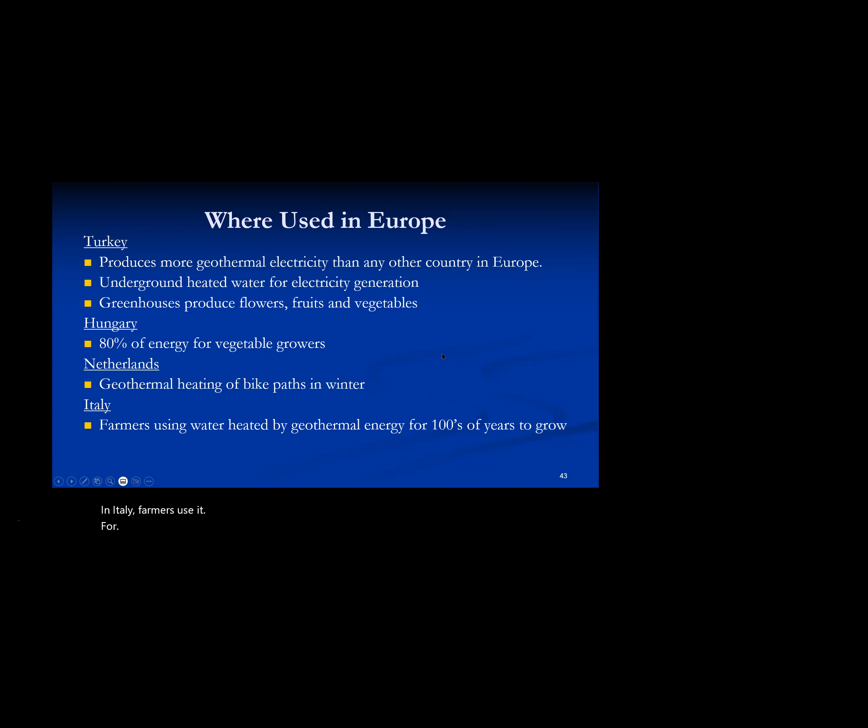In Italy, farmers use it for their farming purposes, and they've been doing that for hundreds of years. Yeah.

France is interesting because in the Paris area, geothermal district heating serves 1 million homes. And there are almost 2 million ground source heat pumps, and that's as of 6 years ago. I'm not sure what the number is now, but from another source, 400,000 heat pumps were installed in 2020, although not all of those are geothermal. Poland is a good place to increase geothermal heating.

The Philippines, that's on the Ring of Fire. They get 14% of the country's electricity from flash steam geothermal power plants, and they've been doing that since 1979 and are still operating. Now, the Philippines, of course, has a much bigger population than Iceland. Indonesia has large potential. They've identified a lot of power plant locations, but they're not all built yet. They'd like to be first in the world.

In Japan, where just about all the land is being used by the population, large projects have been resisted, but there are small plants in operation. So that's good. And Japan's a good place for geothermal because you can build small power plants. China has the largest number of geothermal district heating systems, and they dig deep geothermal wells.

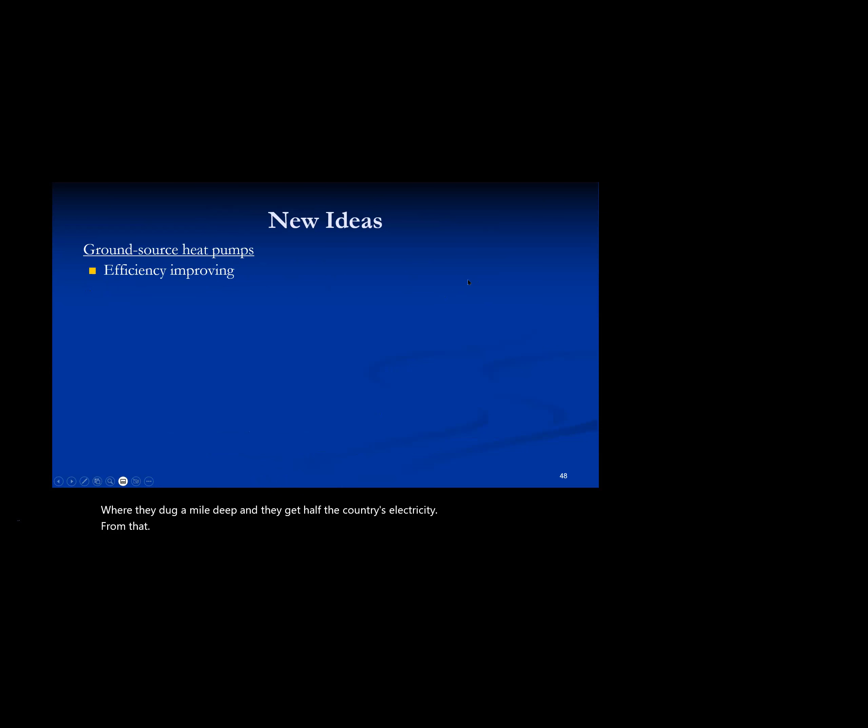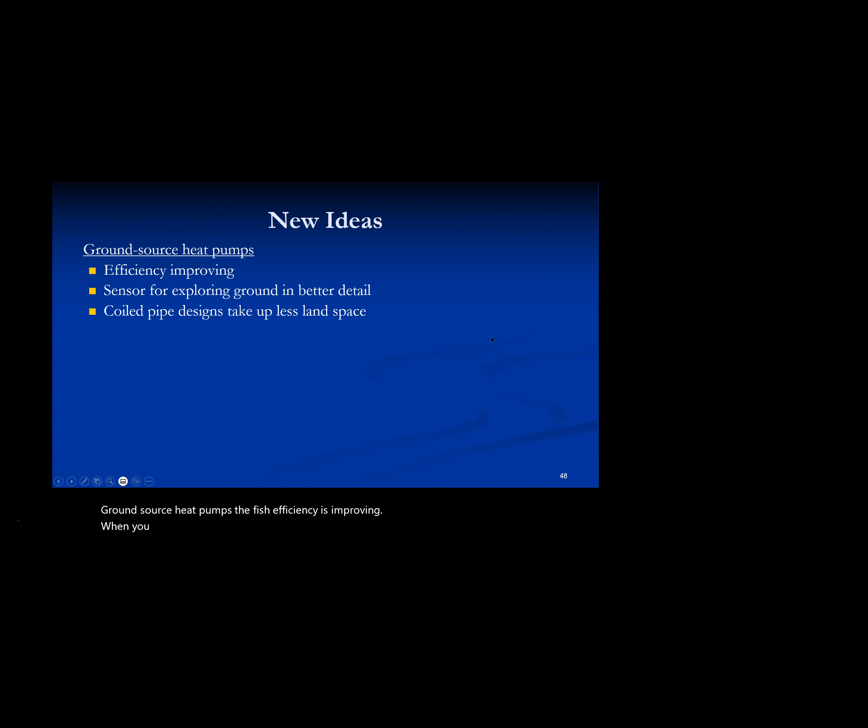All right, I'm going to finish up with some things looking to the future. Ground source heat pumps: the efficiency is improving. When you dig looking for a heat source, you have to have heat sensors in the drill bits. And when they detect the rise in temperature, you stop drilling and see if that's a usable source. Okay. They're coming up with better designs for the coiled pipes that go into the ground, so that it uses less land space.

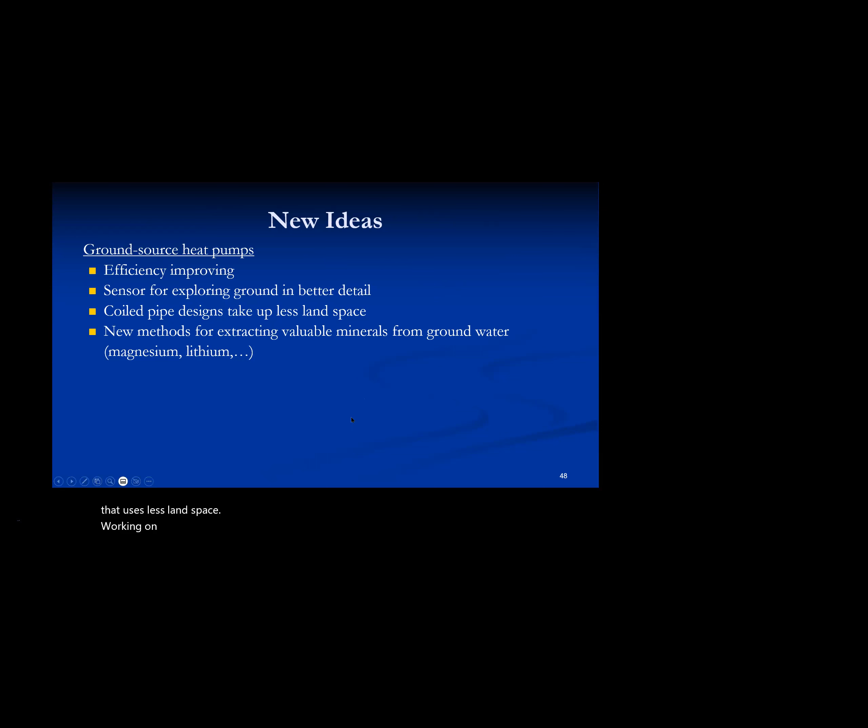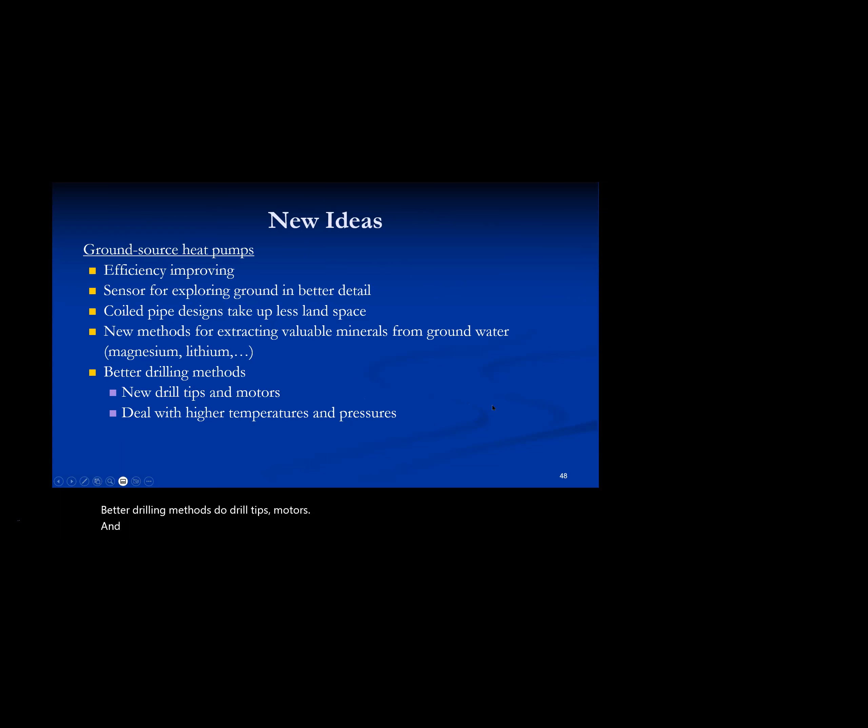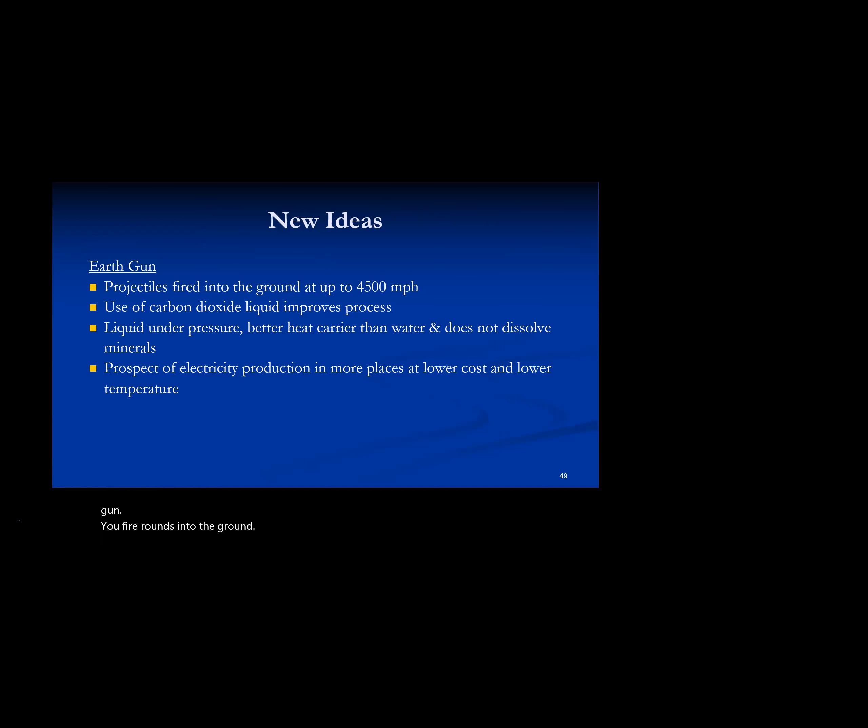When you set up the process, you use liquid carbon dioxide, which works very well under pressure. And it's a better heat carrier than water, and it doesn't dissolve minerals. Water dissolves almost everything. So the prospect there is maybe you can put these geothermal plants in more places.

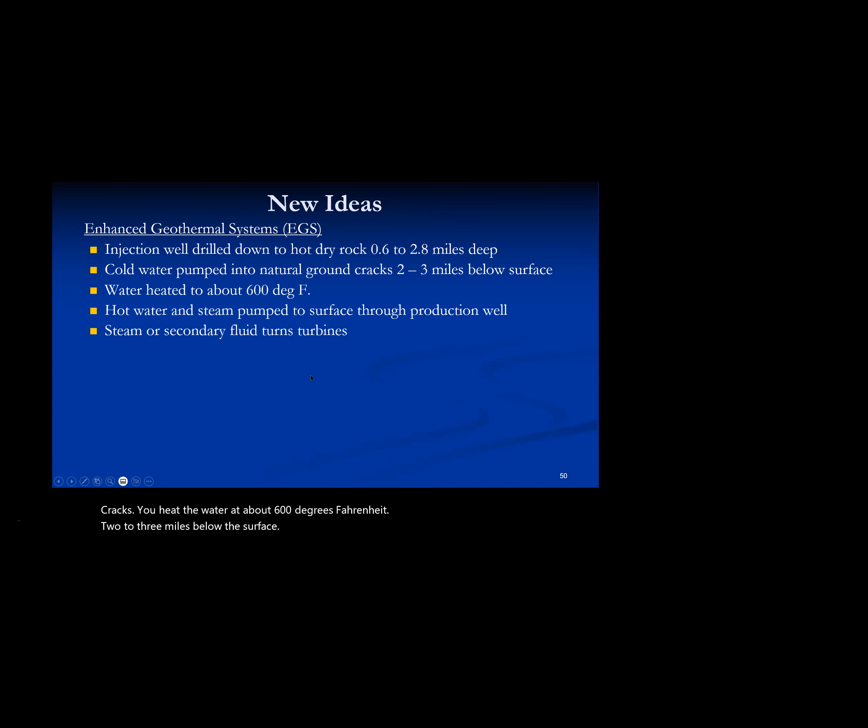Enhanced geothermal systems. You put an injection well down into the dry rock. You pump cold water down there into cracks that are already existing, or maybe you create new cracks. You heat the water to about 600 degrees Fahrenheit, 2 to 3 miles below the surface. You bring that water up, and you use either the steam or the secondary fluid to turn turbines. And then you recycle the water into the ground.

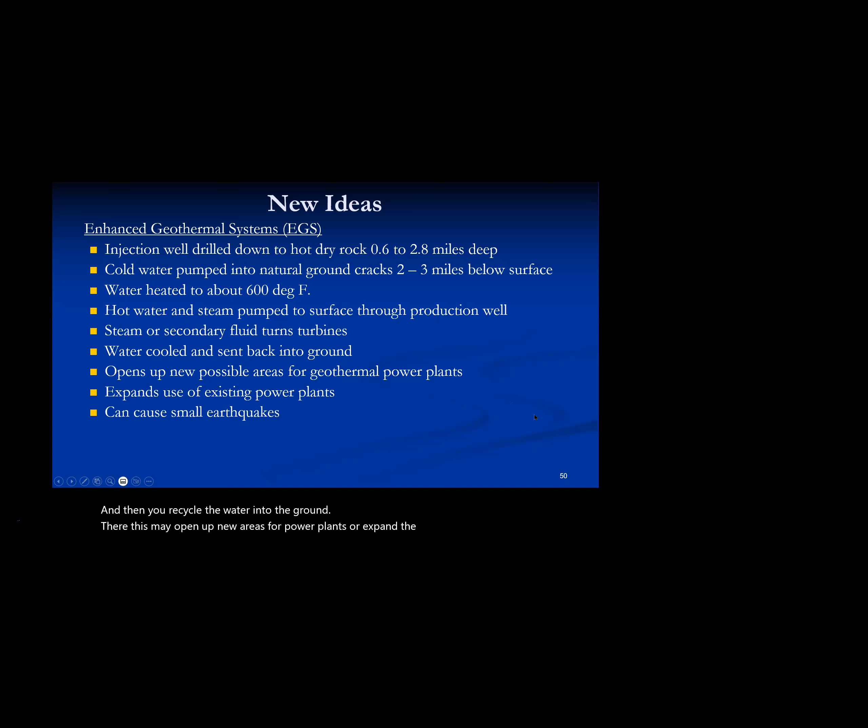So current positive signs. 5 years ago, Coca-Cola said in the Philippines they'd use geothermal electricity. The World Bank report from that same year said there are unused reserves in Latin America and the Caribbean, and we should start looking at it. The UN report was positive about the prospects for Africa. Iceland is sharing what they've learned with the rest of the world.

Germany and Turkey are working together to develop technology and looking at business opportunities. As of 2019, Turkey had the fastest growing geothermal industry in the world. Although in Europe, France is producing the most geothermal units for homes. And in Mexico, there's a Center for Innovation in Geothermal Energy, where they brought together 150 experts, and they've got 30 projects going for Latin America.

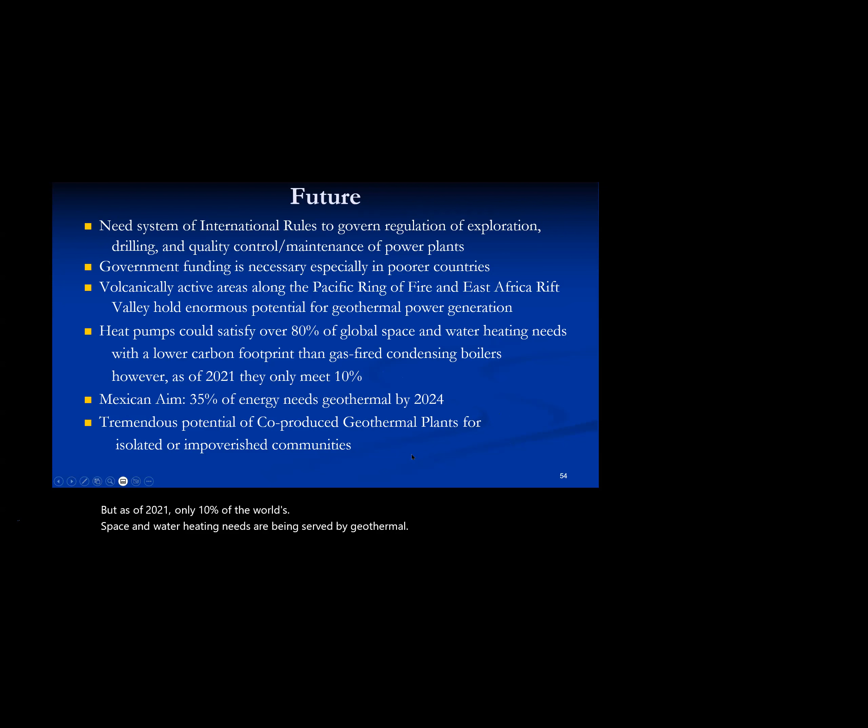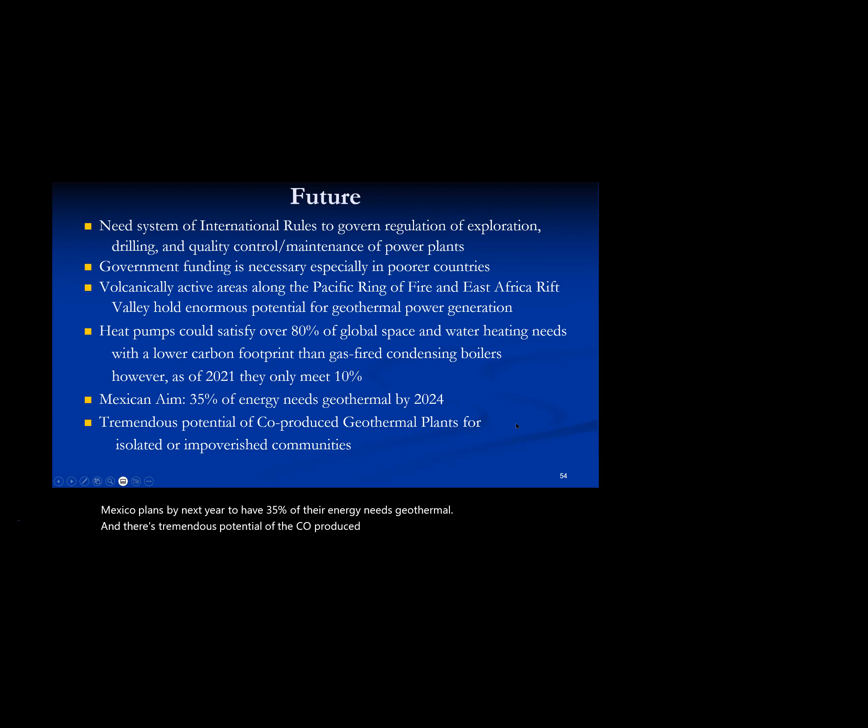Mexico plans by next year to have 35% of their energy needs geothermal. And there's tremendous potential of the co-produced geothermal plants. I think there are oil wells in lots of impoverished countries. If they could use the heated water that's a byproduct, that would be great. And the National Science Foundation and Department of Energy have a partnership for geothermal interns, where they're going to, in 6 months, teach these interns what they need to go out and be productive innovators in geothermal energy.

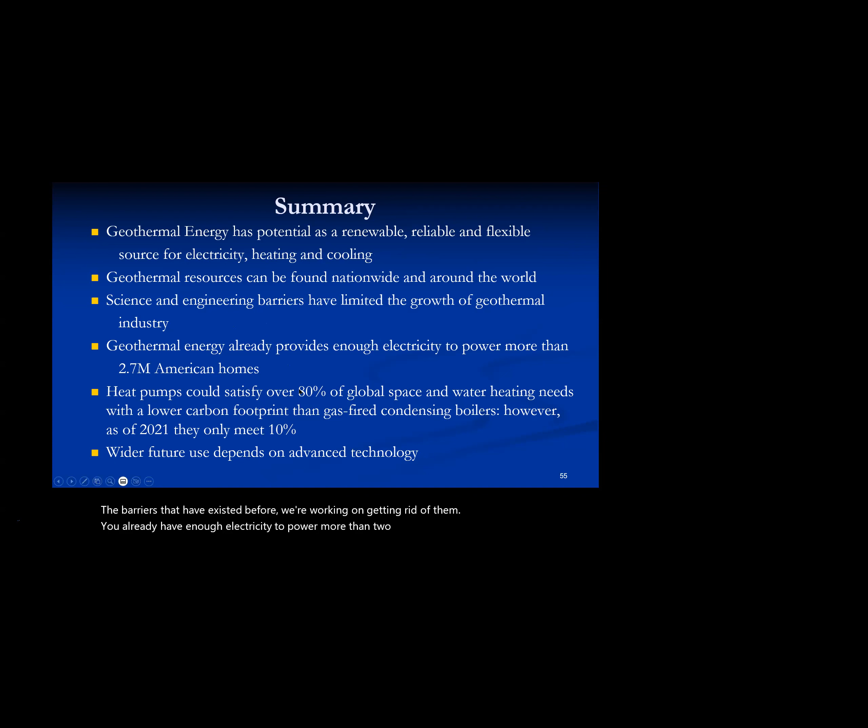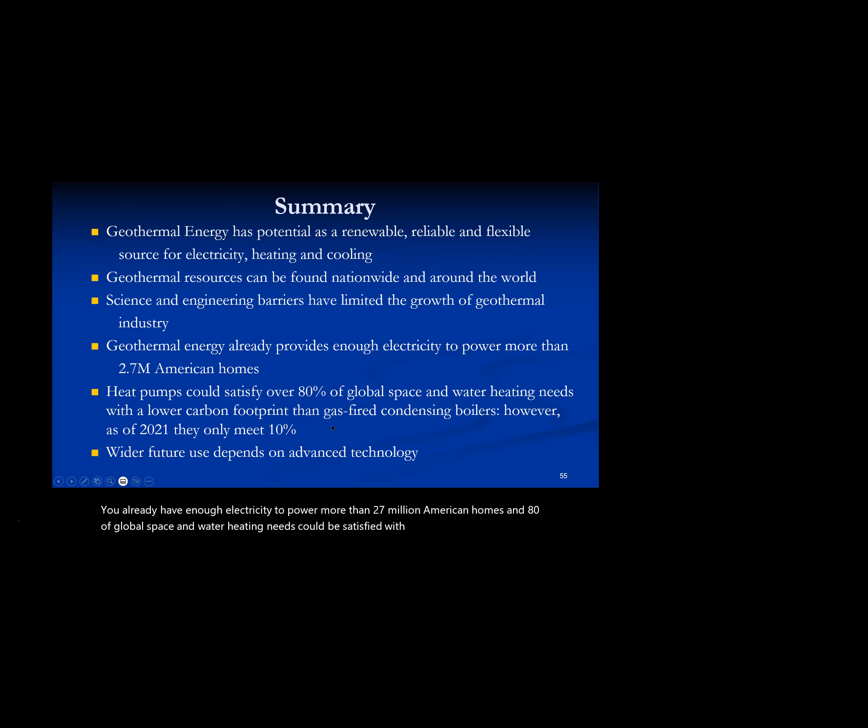So in summary, geothermal energy has great potential: a renewable, reliable, flexible source of electricity, heating, and cooling. There are resources around the world. The barriers that have existed before, we're working on getting rid of them. We already have enough electricity to power more than 2.7 million American homes, and 80% of the global space and water heating needs could be satisfied with geothermal sources, but today it's only 10%. So we're counting on advanced technology and government incentives to increase the use of geothermal energy in the world.

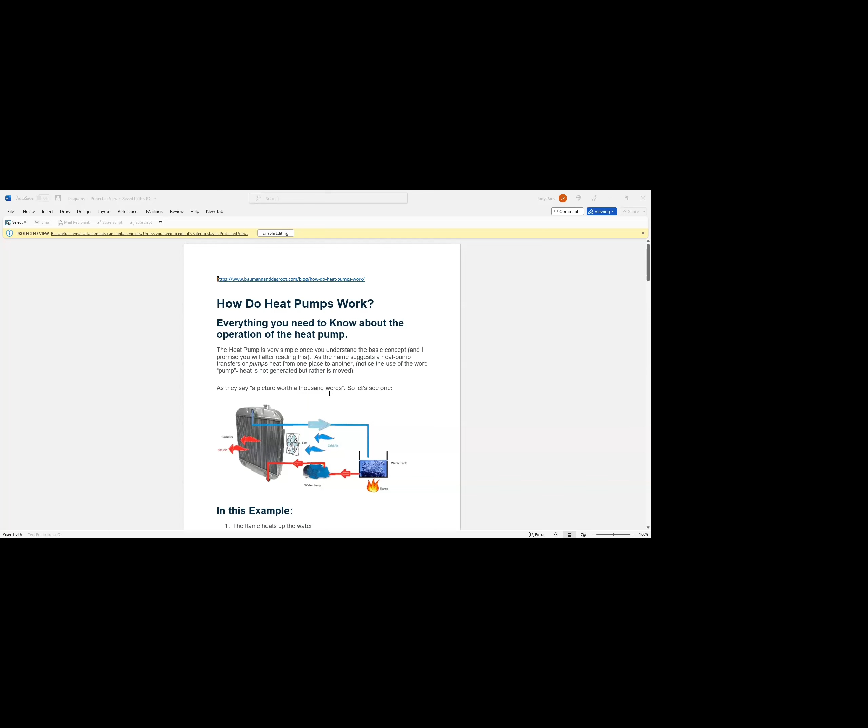I didn't get it. You flashed it at us. Share screen. No, that's not what I want. I want this. Okay. Can you see that? Yeah. Okay. All right. This is what I wanted to show you.